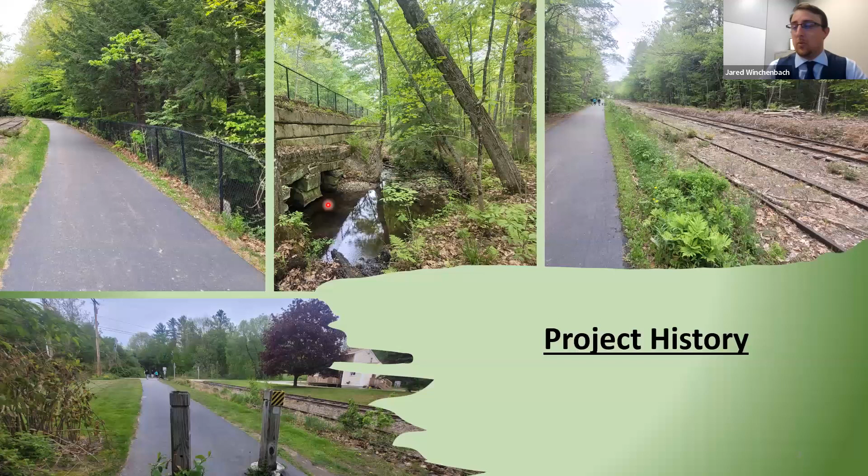Mark did a good job introducing everybody. This is just a list of everybody involved in the design as it currently stands. We do have sub-consultants helping us out along the way. So Mark already covered this, but I'll skim through it and give you a quick update on the project history.

Take a look at the big picture, the overall trail - there's an existing section just north of where we're looking to build. Then I'll go through the project description, limit of work - again Mark already touched on that - and then move on to the overall design and give you a technical presentation on what we're looking to do here.

Quick history - like Mark said, this project's been around since 2010-ish. It got put on the shelf, and now it's kicked back off, and we're looking to update the design to current standards. The pictures here are the northern section of the trail, from Route 202 up to Route 35 in Standish. I was out on it the other day and took some pictures. For the most part, our project is looking to do a very similar thing to what you're seeing here.

Big picture - on your screen, you can see my red cursor moving up and down. That's Route 202 in Windham. Traveling north along this green line is the existing Mountain Division Rail Trail. It comes up to the Otter Ponds and bounds around them, connecting to Route 35, which I believe is Chadbourne Street in Standish.

Our project is starting at Route 202 - or technically ending at Route 202 - and going south towards Bridge Street in Westbrook. The existing trail is approximately 5.5 miles, and we're looking to add another 5 miles to it, making it about a 10 to 11 mile trail, which would be pretty cool.

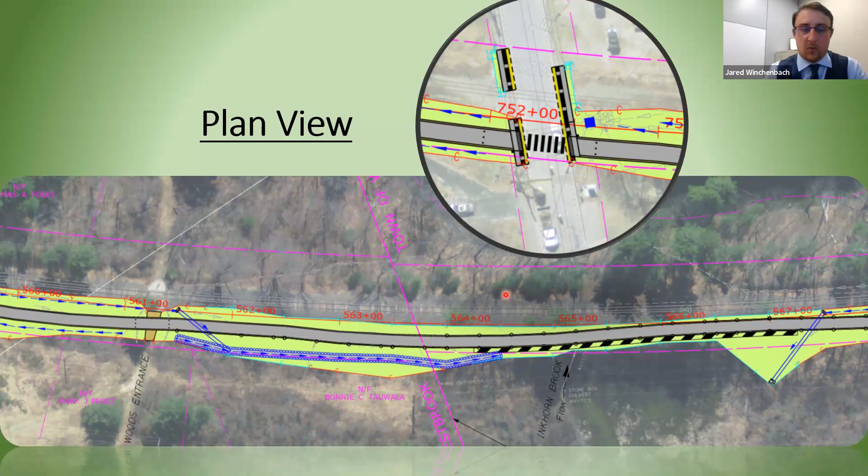Moving on to the next section, typical sections. What these are, for lack of a better way to describe them, it's basically if you take the trail and cut it like a sushi roll. What it does is you're cutting through and looking at the section itself - the gravel depths, the pavement, the ditching, stuff like that. Neither the profile nor the typical section is super important. If you have questions, feel free to ask, but it's really not the main focus we want to get to today.

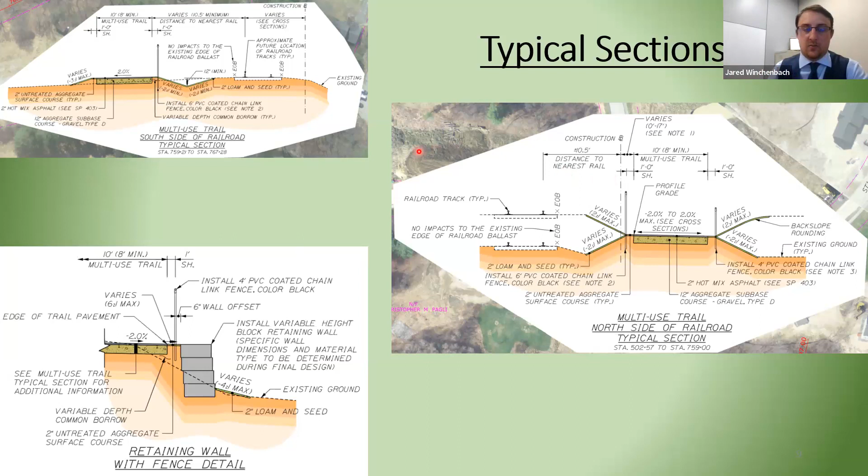So what I'd like to do now is just kind of walk you through the plans. These are going to be close-up snips of what the color rendering plans are. I obviously couldn't fit the whole roll plan in each slide, so I tried to break it up and zoom into the points that are more applicable.

Bridge Street - we start at Bridge Street in Westbrook. Bridge Street is running top to bottom on the screen here. There's an existing sidewalk on the east side of Bridge Street, which we're tying into. Then obviously the trail will take off from there and go north. A couple things to note: we're putting in rectangular rapid flashing beacons, you can see a couple black dots here. For those who don't know what those are, there's quite a few of them, I believe, in Westbrook and a few in Windham.

If you're up by Depot Street, they just put a couple in. Basically, it's for pedestrians. You push the button, flashers go, and it alerts cars that people are trying to cross there. So we'll have a set of those going in at this location.

The three dots you see here are bollards. One thing to point out with the proposed bollards on the northern section of the trail, currently they're wood posts in a concrete sleeve. These are actually going to be steel bollards, and they're going to be collapsible, so if emergency access needs to go on the path, they can remove the bollards and drive on it if needed. That'll be kind of an upgrade over the northern section of the path as it currently stands.

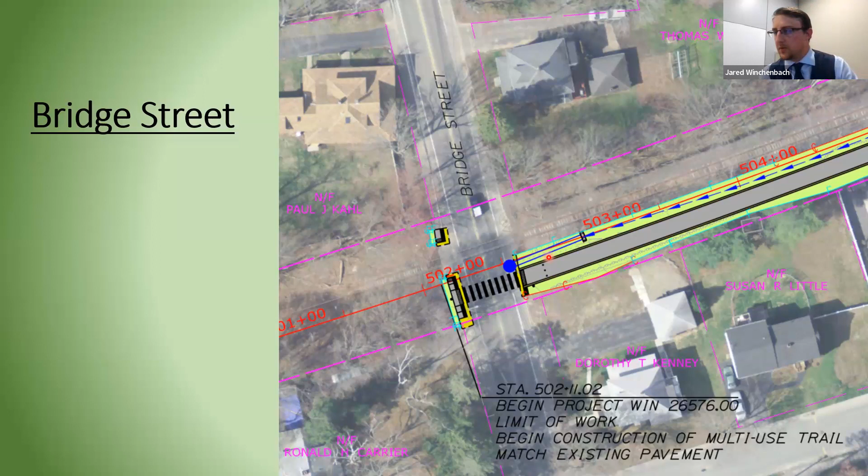Let's just make sure. Yep. So this is the first section, Bridge Street to Pierce Street. Bridge Street is on our left here, Pierce Street is on our right, up top. It's a little hard to see on my screen, but there's not a ton going on here. The grades are pretty shallow, we're not going to make the path go up and down too much. The grading is pretty minimal, so we're looking to minimize impacts along the backs of these parcels throughout between the limits shown here.

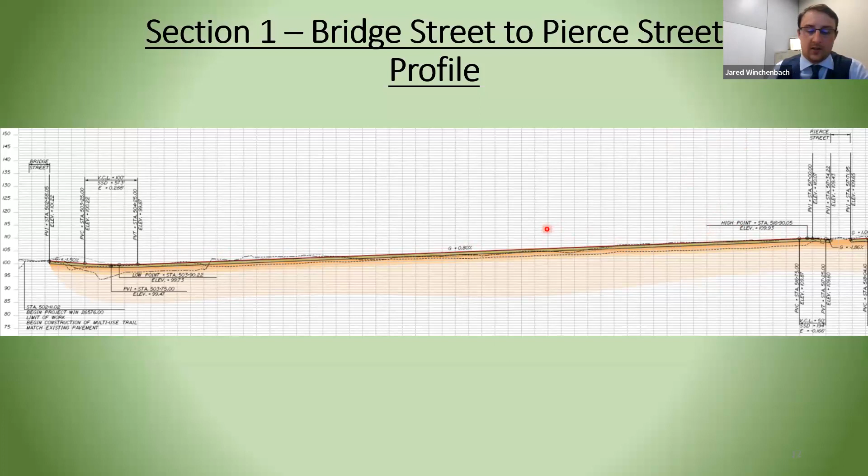So you can see the profile here. It's pretty flat, 0.8%, so very flat. It's very similar to the northern section of the trail. If you've walked that, you know it's very flat, very little vertical incline or decline, and that's what you're going to see here.

So it should match into the existing condition pretty well. Once we get to Pierce Street, very similar to Bridge Street in that we're going to end up tying in. There's an existing sidewalk on the east side. One thing I noticed after we put these graphics together, we're working to get updated survey, there's a mid-block crossing right here, an existing one. What might end up happening, I'd have to talk with the town or city on this, we may, since there's a sidewalk on this side but doesn't appear to be on the west side, extend this sidewalk down, connect to the path here, and cross there, eliminating this little portion of sidewalk, just to keep us from having two mid-block crossings within 50 feet of each other. So that might be one thought we could do.

Other than that, it's very similar to Bridge Street. We aren't proposing RRFBs at this location at this time, but you'll see the three dots where we are putting in the collapsible bollards. You'll see that collapsible bollards will be installed at every roadway and every access road through the project.

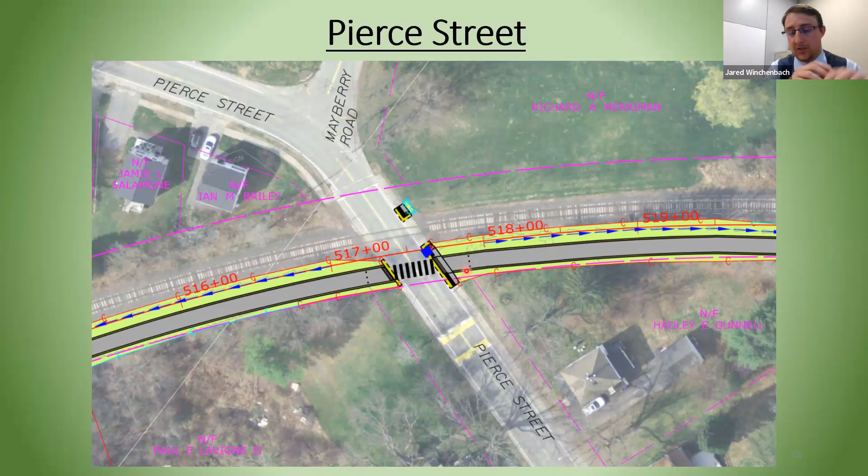The next section is Pierce Street to Stillwater Drive. Pierce Street's up on the left here, Stillwater Drive off to the right. It's very similar to the last section. You can see the profile down below here. It's very flat, we're not doing a bunch, we're not increasing grades.

One thing I think I failed to point out when looking at profiles, these black lines I'm tracing are existing ground lines. There are three of them in this case because we did one at the alignment and then a couple offsets of it, just to get a better picture of what the ground is doing. So you'll see that we might be cutting through some hills in order to make the trail a little less impactful to the surrounding area.

That will be, you'll kind of see this hill here aligns with this grassier area. So the bigger the grass areas, the larger the cuts or fills you're going to see. The intent was to not put those large areas in the back of somebody's yard.

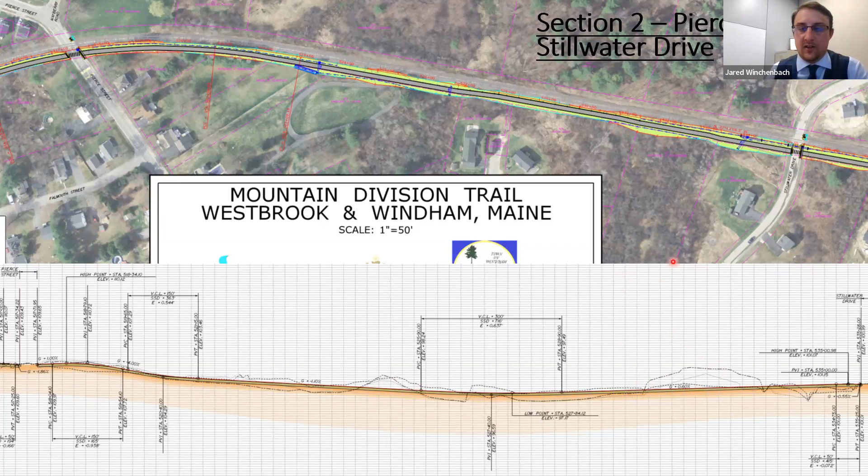Once we get to Stillwater Drive, very similar to the other two. Again, no RRFBs located here. We do have the trench across the road for drainage purposes. Other than that, we'll have the bollards, and that should be it at this location.

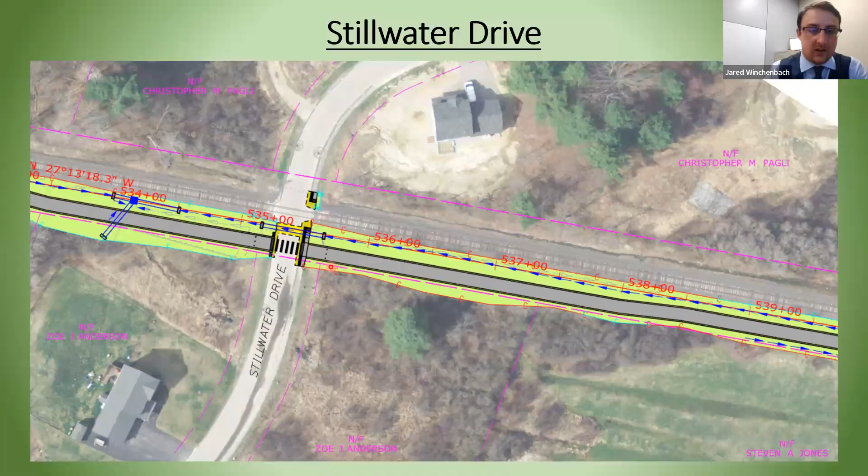Next section, Stillwater Drive to Rousseau Road. In between here, you can see this is actually where I got that other graphic from. It might be hard to see, but this is the town line. So in the graphic itself, you get Stillwater Drive here, it's going to continue left to right on your screen, then drop down here and continue left to right.

So a couple things to point out here. As I mentioned, we have an access drive. This is the first of the wooded entrances. Those are all set to remain.

You will see the first retaining wall on the project. This is just a little 2-foot, 3-foot wall. It's really just in between the path and the railroad to get drainage to work.

But you will see a much bigger wall here and down here. Reasoning for that is, again, high fill slopes that we're trying to avoid, potential impacts to wetlands, stuff like that. So continuing down, like I mentioned before, kind of jumped ahead, but this is the town of

Windham, city of Westbrook town line. So everything left of this and up here is all Westbrook. Everything moving forward is Windham.

We start out with the first of 2 stream crossings that we're going to have on the project. Inkhorn Brook. There's an existing stone arch bridge culvert that we'll get to a little bit later in the presentation, but just know that this is the location of it.

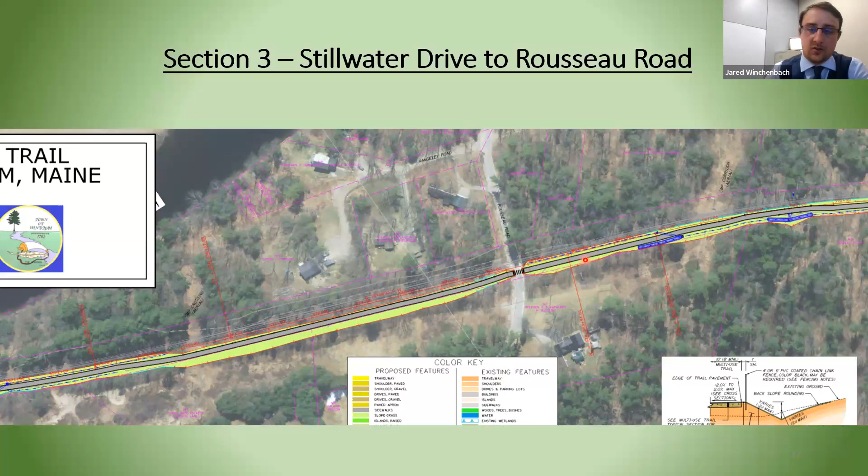Rousseau Road's crossing is pretty simple. I'll have a slide on that in a minute. And then other than that, we're just going to continue working the same kind of way that we had before, ditching to get the drainage where we want it, and then constructing the path.

Section 3, Stillwater to Rousseau Road, this is that profile I was just explaining to you. So about half of this, for you guys, this is Stillwater Drive right here. And then you're coming across left to right, same as we saw in the graphic, very flat for the first while. And then we start getting into, this is really where the rolling terrain starts coming in.

As you walk, this is going to feel different than when you're walking the northern section. The northern section being very flat for the most part. When you start at Route 202 up to Gambo Road, at the very least, is very flat. And once you get past this section on our project, it's going to have a little bit more rolling terrain.

Reason for that is this area is a little bit more geographically challenging than the previous, the northern section. So in order to minimize cuts and fills, we have to kind of raise and lower the path in order to make it work.

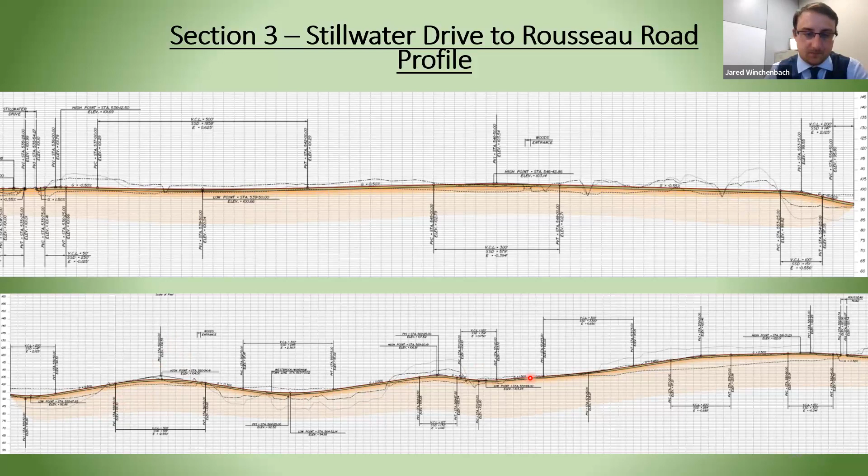Rousseau Road, the simplest of the crossings. A lot of these crossings will look very similar to what you'll see on a lot of Eastern trails when they cross smaller volume roads.

No other sidewalks on Rousseau at this time. If they were to be added at a later date, they could be included into the design. It's very easy to add them in, but at this time, there's no sidewalks on Rousseau, and we're just looking to basically put a crossing right through there. Again, no RRFBs, just collapsible bollards, pretty simple through there.

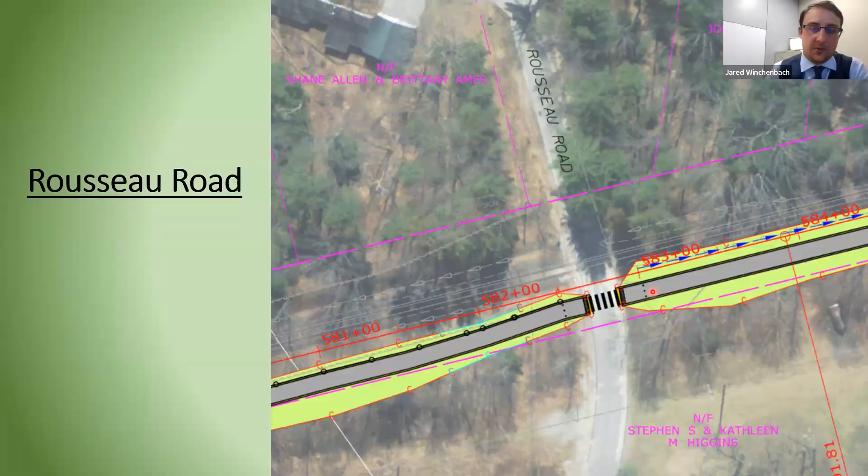The big section, Rousseau Road to Mallison Falls, I'm going to skip a little bit quicker on this section, just because there's not a ton of houses on this, and it's the largest of the gaps that I have to try to cover.

You can see the profile is down below, which lines up relatively well with the stationing. You'll see a couple where I keep the same profile down here, but just know that's what I'm trying to show, the kind of rises and valleys as we go through here.

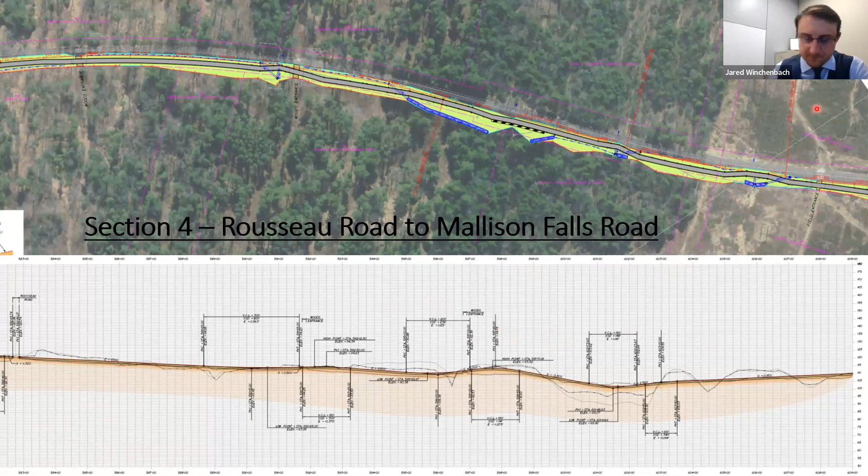So again, you'll see the blue ditching, you'll see the couple retaining walls. This on the right side is the CMP corridor that runs through there. So they'll still have access. We have an access road that goes into the CMP corridor for those of you that use that trail system. You can see that we're getting more green areas, which means we're a little bit heavier cuts and fills.

That's just due to the geography of the area. You can see some hills through here. It's not super rugged, still kind of rolling terrain, but it's flattening out a little bit through here.

More of the same, continuing across left to right, moving towards Mallison Falls Road. Not a whole lot to say in this section, pretty much more of the same. We've got a little bit of a high cut here, a woods entrance, and another high fill there. So we're pretty rural at this point.

You can see the Presumpscot River at the top here. So we're kind of close to it in some aspects, but we're still on the north side of the existing railroad tracks for the entirety of the project, until you get to the very end, which I'll explain a little later.

Again, more of the same. You can see the path weaves in and out, and then straightens out for a while. Those offsets where we're weaving in and out are sometimes meant to minimize impacts to the abutting landowners and stuff like that. We're just trying to minimize impacts the best we can by moving the trail as we need to.

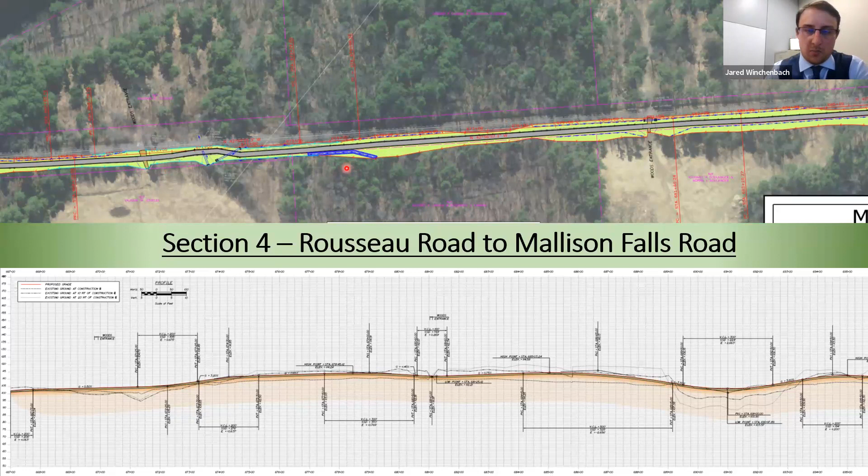I think we're coming up to the second stream in this project. So Colley Wright Brook is located right here. Again, we have a retaining wall going over the top of it, and I'll talk about Colley Wright a bit later in the presentation. Just know, this is the kind of location between Rousseau and Mallison Falls.

One other thing I want to note, there's a flag right here. I think it was 2012, the Maine DOT had installed railroad from Bridge Street up towards the existing railroad at Route 202. Their project ended right about here, so there's no rail from here moving forward.

What we did was use the Maine DOT's right-of-way mapping and future railroad plans to figure out where the proposed rail is going to be. That way we can maintain our offsets, and it doesn't preclude adding a rail at a later date if anybody chooses to do that. So we're still maintaining those offsets.

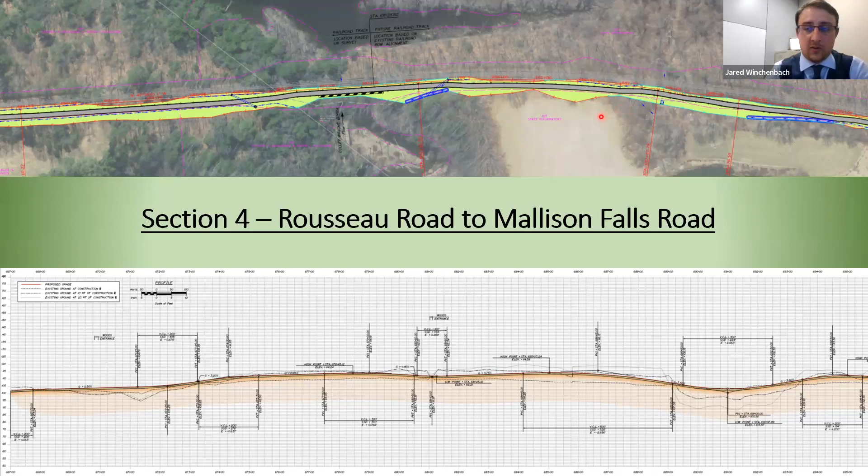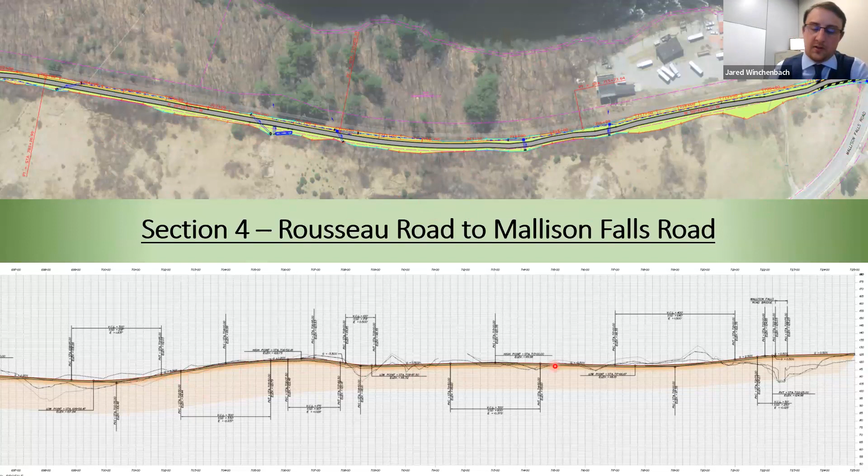Moving forward, this area is where you start getting into the Maine correctional facility. On the bottom of your screen, that's the Maine State Correctional Facility. The path is on top here, on the north side of the railroad, or future railroad. On the right side of your screen is Mallison Falls Road. The profile stays pretty flat through the majority of this, with a few hills here and there.

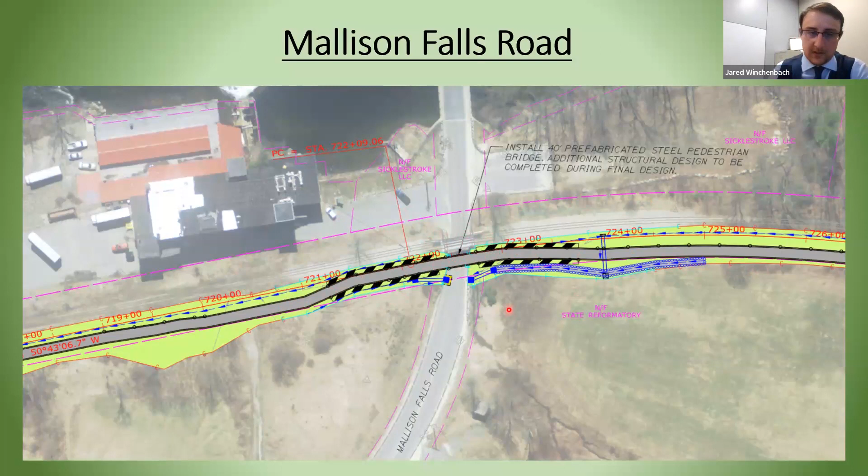At Mallison Falls Road, one thing I wanted to point out, we don't have an at-grade crossing. We're looking at putting in a 40-foot prefabricated steel pedestrian bridge that will keep pedestrians at the same level. There's an existing railroad bridge right here that we're not impacting. We're building at roughly a 10.5 to 15-foot offset, I can't remember exactly. So pedestrians can basically come up, over, and back to the path without having to cross Mallison Falls at all. That's our plan there.

Last couple sections we're going to look at: Mallison Falls Road, just off your screen on the left, to Depot Street. Mallison Falls runs left to right on your screen, then drops down and runs left to right again, with Depot Street right here.

As far as the plan goes, it's very similar to everywhere else. You see a deep cut here because you're on the backside of a hill. Other than that, there's not a ton of impacts. We're just ditching in order to get the drainage to go where we want.

The profile through here is very flat. Nothing particularly special about that.

Depot Street, this crossing is going to be a little more interesting than the others, only because the town recently did a project on Depot Street where they installed rectangular rapid flashing beacons at this location. They built sidewalks on both sides, made it look really nice. Our survey, you can see some gray in there, doesn't include that. We're getting a survey update in order to better understand the intersection and how it's laid out.

At that point you may see a new design here, but as it currently stands, this is what we're proposing. We're trying to tie into existing or recently built sidewalks and maintain nice trail connectivity going straight across, keeping the path on the north side through this section.

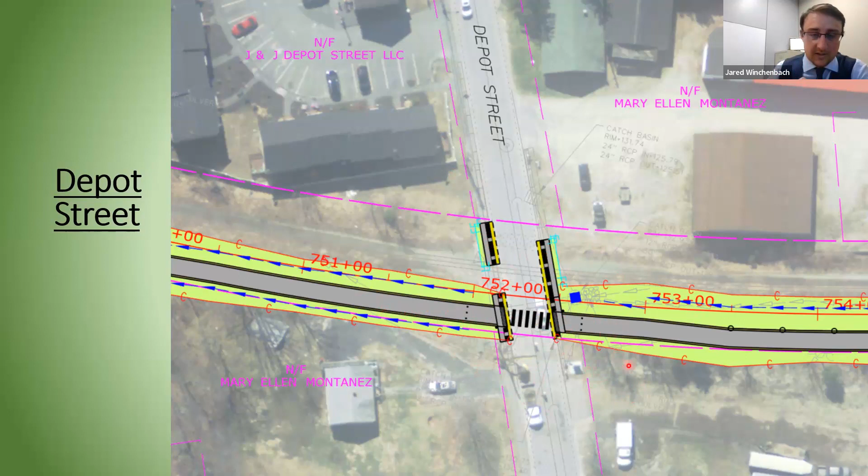So the next section and the last section, Depot Street is on your left, Main Street is on the top right of your screen here. You're going to keep the path on the north side all the way up to an existing driveway. I think this is the fire station, and I believe they build satellite dishes in this lot. I might be mistaken, but I believe there might be a fire department practice facility or something over here.

This driveway essentially has access to a parcel over here, and we're looking to make use of that and cross at a similar location in case, or when, the rail comes back. They'll want to minimize as many crossings as they can, so if we put it next to the driveway, it just makes it easier for them in a future condition. So we'll cross to the south side and finish up there.

The main reason we're moving to the south side is twofold. One is down in this corner, you'll see Black Brook, so in order to avoid impacts to Black Brook, it would make sense to move us to the other side of the rail. The second thing is that the northern section is on the south side of the trail, or the rail, so it kind of makes sense to switch over.

It may be here. We did talk with the town, it may be at Depot Street. We haven't quite finalized where we're going to transfer, but this is as it's currently shown. This is what we're looking at doing.

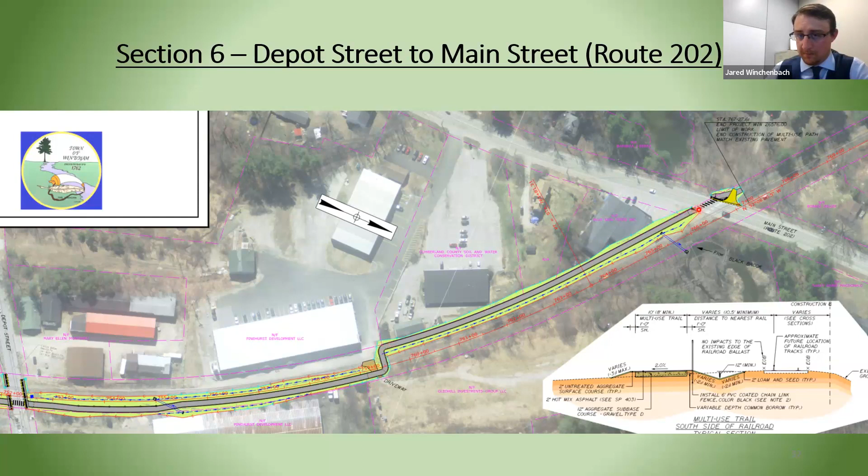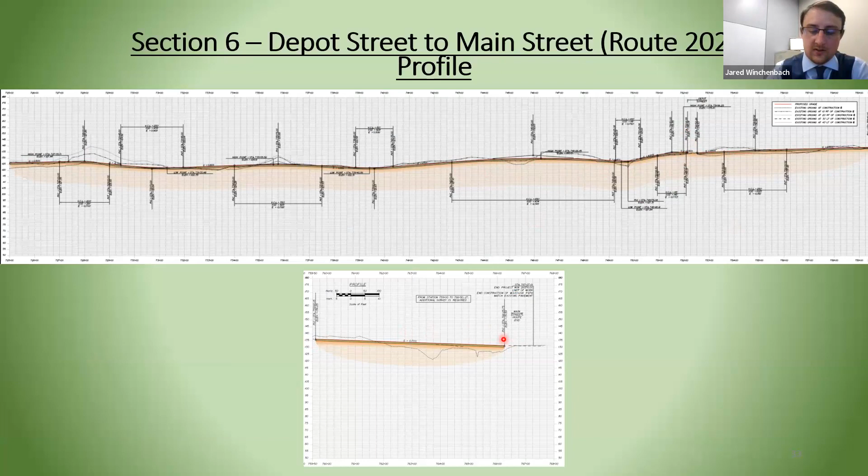Profile through here, you can see two sections. So Depot Street's right here, so it's really looking at this section, very flat. And then this is from when we cross over the rail up to Main Street, very flat again. So that's going to look a lot like the existing rail section, or the existing trail section just north of us. As mentioned, we're on the south side now.

This is Blue Seal. We're going to have a crossing location here. One thing to note, Route 202 Main Street, the town of Windham has another project going on right now where they're looking to build sidewalks and put in an RRFB at this location.

We're working with that project to ensure that there's no overlap and that we don't have to reset stuff at a future location, at a future time. Basically trying to minimize rework as best we can, so there'll be some changes here in the future. We're looking to kind of minimize the challenges there by working with the engineers on that.

One thing to note on this top side, this is kind of a challenging location. There's an existing driveway that goes up to a house here, and they kind of have a mixed driveway / multi-use trail entrance here. We're trying to fix that by delineating the two and giving them a proper driveway without having it mixed in with the trail itself. So that's still a work in progress, but that's the idea.

As mentioned before, Black Brook right here, there's a crossing, there's a culvert that goes from here to here. We're looking to avoid that, that's why we're on the south side. So that gets you through the plans. Thanks for staying with me on that, I know it's a little bit long-winded.

Drainage real quick. Mostly drainage is going to be open and closed drainage. Open drainage is basically ditching, closed drainage is using pipes and catch basins. There'll be a little bit of both, but for the most part, we're going to try to do ditching. It's just easier to maintain.

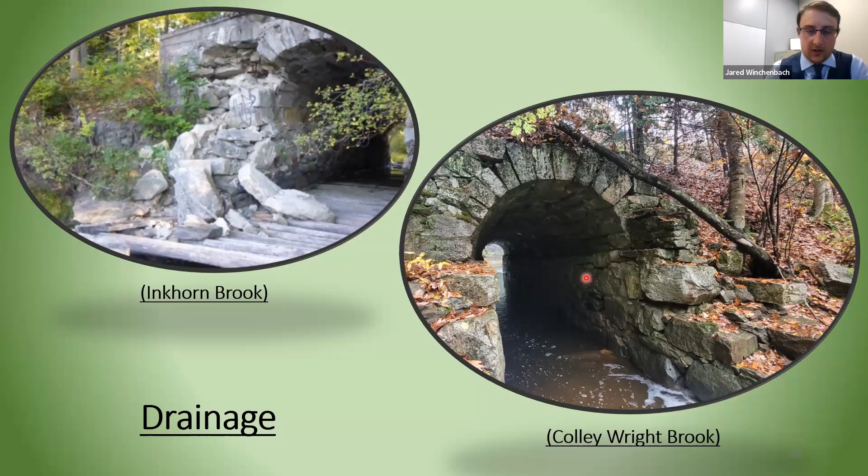The DOT is starting to look into it. They've hired, or are looking to hire, a structural team to investigate these two bridges, and we'll be working with them moving forward. We don't have any information right now, as it's very much in its infancy, but we're trying to figure out what shape these culverts and bridges are in, and how to move forward at these two locations. So more to come on that, but nothing in the short term.

Real quick, looking ahead, a couple key things. We've got utility coordination. For the most part, this project shouldn't be a huge utility issue. There's not a ton of utilities out there right now. Where we do run into utilities will be at the side roads for the most part. When we do have utility conflicts, we'll try to minimize them as much as we can, to make it easier for everybody. If we can mitigate what we're doing out there, that'd be best for everybody involved.

Next thing is environmental coordination. We have a sub-consultant on board to help us with the environmental work. There's streams out there, and we have wetlands that we know about. We're still getting those delineated and into our survey. Basically, they're on board to help us through the environmental process, and coordination with the agencies is ongoing currently. They're going to help us through the process there.

Next, I want to chat about the right-of-way process. The trail itself, the 10-foot wide trail, with the one foot, so basically 12 feet - 10-foot paved, 1-foot gravel shoulders on either side - will be maintained within the existing railroad right-of-way. So you won't see the path outside the right-of-way. However, there will be grading outside the right-of-way, so where you see those fill lines coming down past the right-of-way, that's mostly due to...

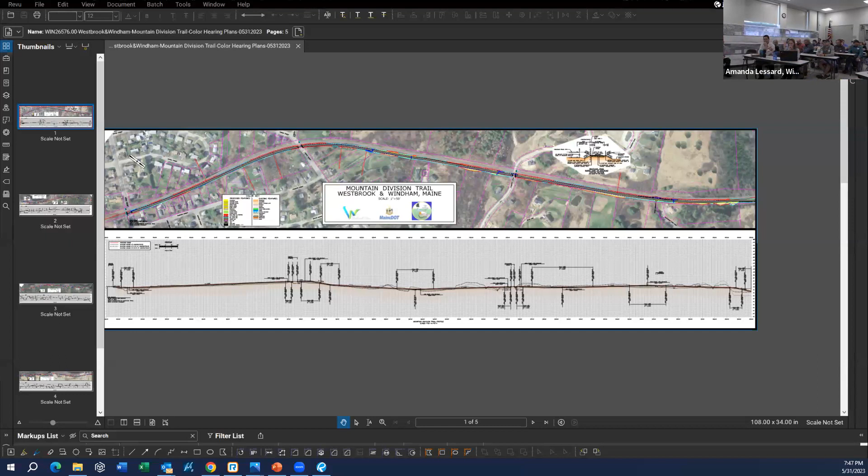Nancy: How is it you got a 2 to 3 foot wall? It's described as a little wall, and there's animals there. How is an animal, a deer, gonna jump a 2 or 3 foot wall? How is this impacting the wildlife? This is supposed to be a nature trail, supposed to be an improvement of nature, people walking. How are these things improving nature?

I think the walls, for example, are just over a short distance, so certainly the animals can move beyond those and figure it out. The purpose of the trail is to be blended into the environment, but it is a human right-of-way edge there, so we're doing environmental review to try to evaluate it.

And I had another comment - you're putting this near the railroad tracks, because at some future date you're thinking there's going to be a railroad. Is that correct? There could be. No, we're putting it near the railroad because there's right of way, we can put a trail there and we'd like to have it off the road, so that's the reason why.

Well, I thought you made some comment that it could be at some point. Well, there could be. Okay, so that's another reason, because there is some requirement that the distance between the trail has to be from a railroad. There's some state requirement, I think it's 11 feet. Jared mentioned what that was, so.

Yeah, the distance between the nearest rail and the nearest edge of path is technically 15 feet. But you can go down to 10.5 feet, which is probably where you get close to the 11 foot there, under certain stipulations. Which is why we're working with the Maine DOT and their railroad department to ensure that in areas where we drop down, we meet the criterion.

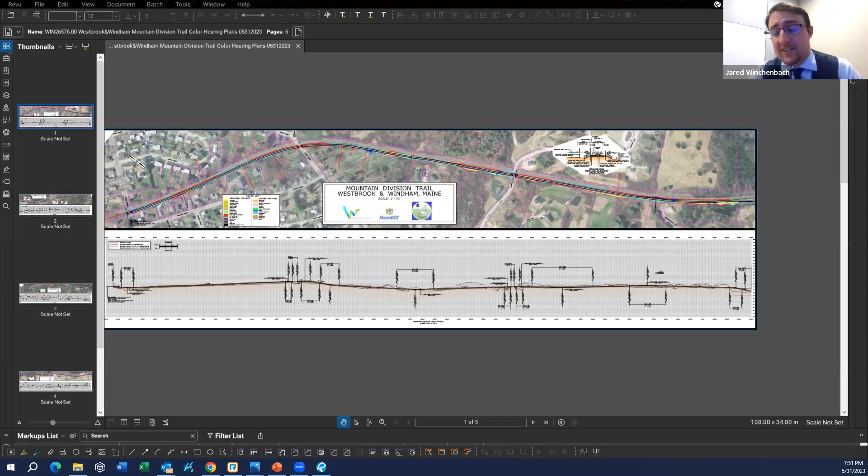Bruce Elder: We have property on both sides of the railroad track, and we do have a road that crosses, so you're right on that topic. What's the width of the railroad right of way? It varies throughout the project, depending on what section you're in. I'd have to look back at the PDR. There's sections that are 60 feet, there's sections that are a little bit bigger. I don't recall off the top of my head exactly what it is. We're just above Russo Road. Our road is a few hundred feet to the Windham side of Russo Road, and we're concerned about access to that piece on the riverside.

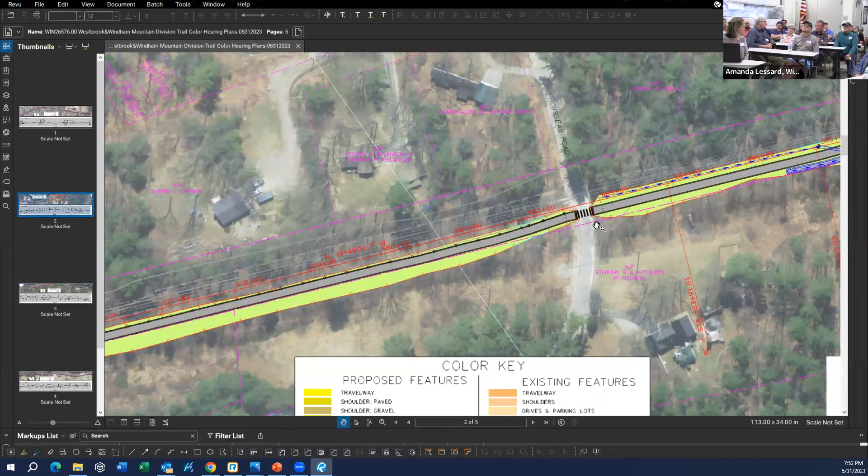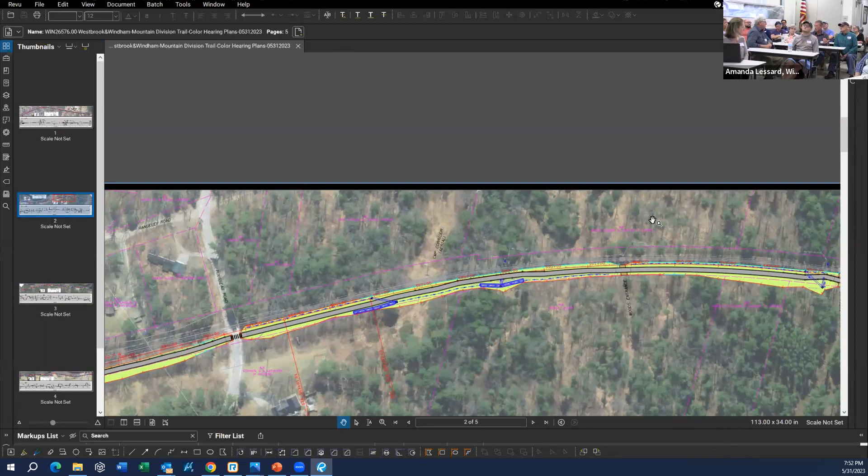So I guess I'd want to know what limitations there might be as this comes through in terms of development, perhaps, because there's land enough for the riverside that it wouldn't be us, but our next generation might very well want to. There's probably 4.5 or 5 acres between the railroad and the river right there. There's another parcel that we own that has a little less than that.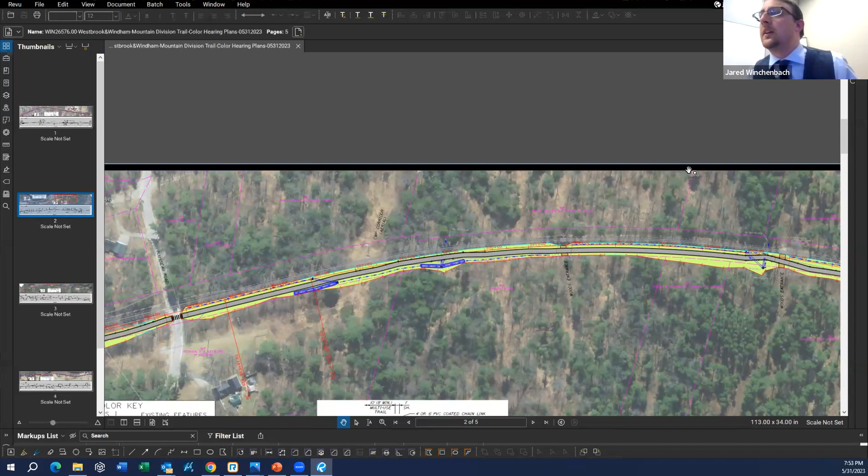So I didn't catch your name and I apologize for that. Bruce Elder. Okay, can you guys still see my screen? Yes. So I believe this is the property right here. I see Bruce Elder here and one right here. And the right-of-way lines are going like this, if you can see my mouse.

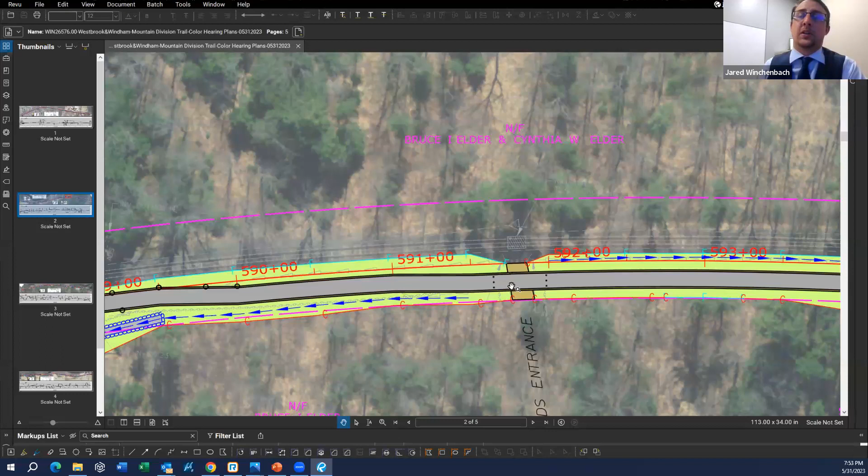So we do have currently, I don't know how many crossings you have in your parcel, but I can see one for sure right here that was flagged in the old right-of-way railroad tie track crossing. We are maintaining that. If there's a certain width you would need to get through there, that's a conversation we can have. We were just basically holding the width of the ties and going a little bit wider than what was out there currently. But the intent would be, if there's access to be maintained, we're not looking to create difficulties there. But any future crossings, just like you'd have to do today, is a licensing agreement with DOT. And if the trail was constructed and you later wanted to cross it, you could do that and go through that same permitting process.

And I would add to it that not only for that development, not only are you crossing the trail, but you're crossing the railroad track, so you need the approvals to cross. You'll have a harder time probably getting approval to cross the railroad tracks than you will need to cross the trail.

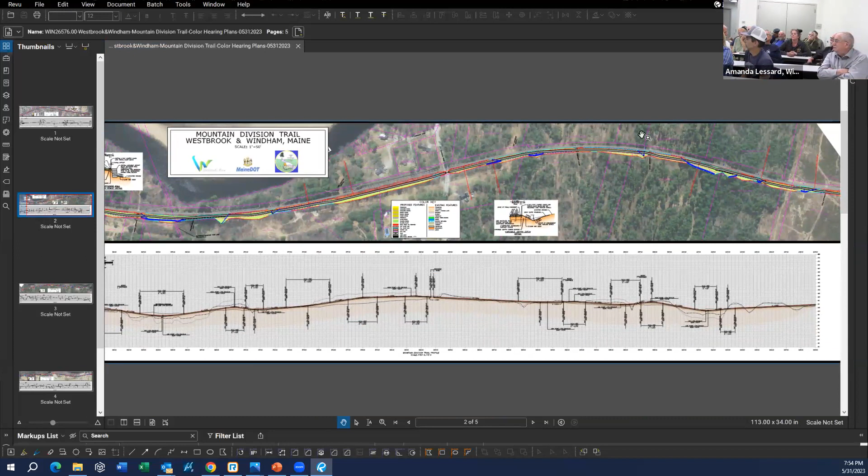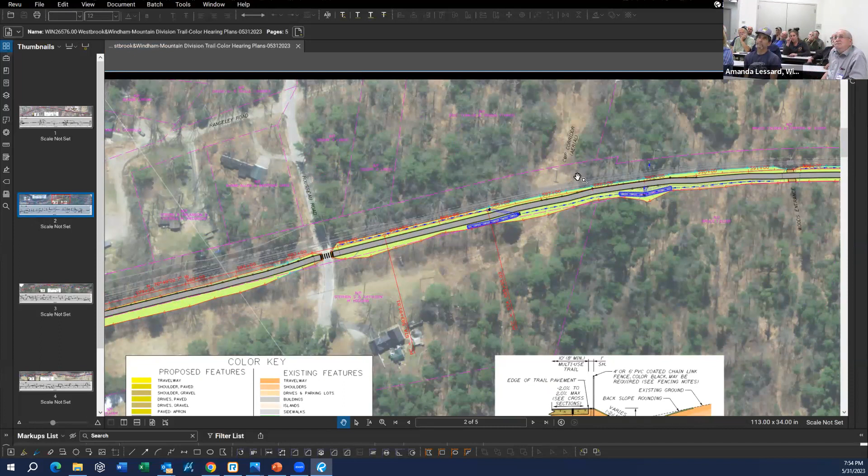I'm just wondering if landowners can request... Oh, I'm Trisha Tomkus, we're right next to Elders actually. And I'm wondering if landowners can request fences, because that area with the CMP corridor, that must be a really old picture, but that is our property and we have a hoop house out there and gardens. Our daughter has a camper bus that she camps out in overnight, and it's really open, so there's going to be a huge change in privacy and security concerns.

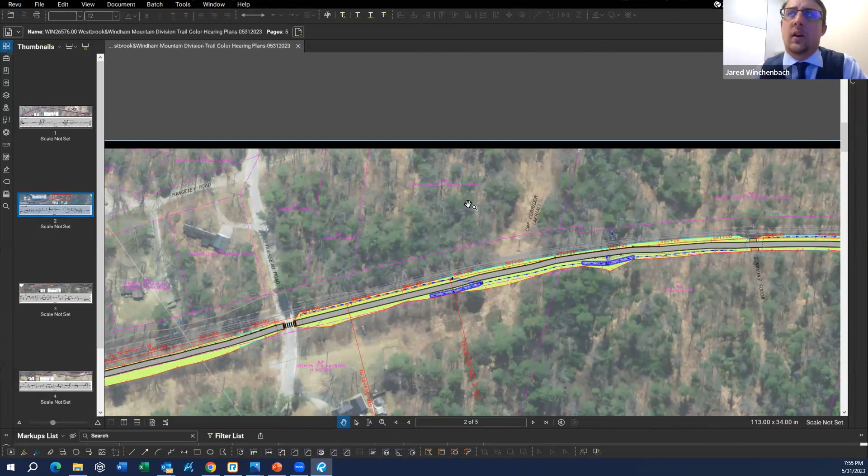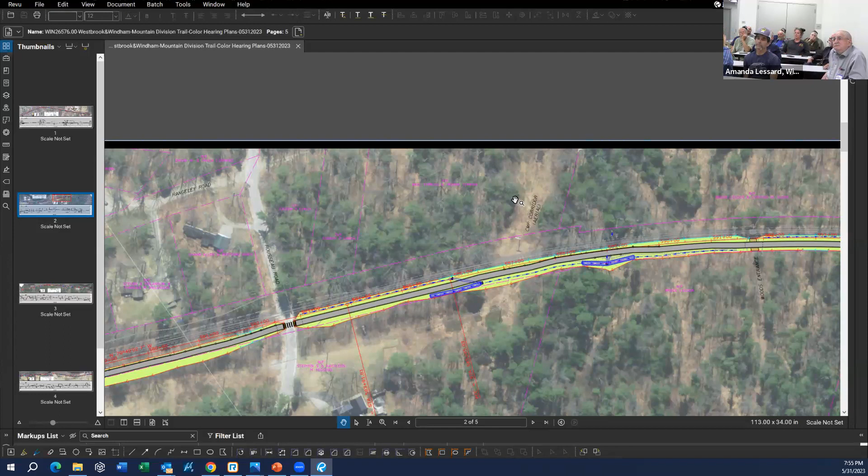So, you're on the south side of the rail currently, is that correct? Yep. Okay. So our area, the CMP corridor, that's all our property in our field. They have that right-of-way, but we own that property, and that's where we have a camper bus and a greenhouse and a bunch of different things out there, and it's a very open view when you walk by on the railroad tracks currently, so I just really worry about it kind of inviting people in, you know.

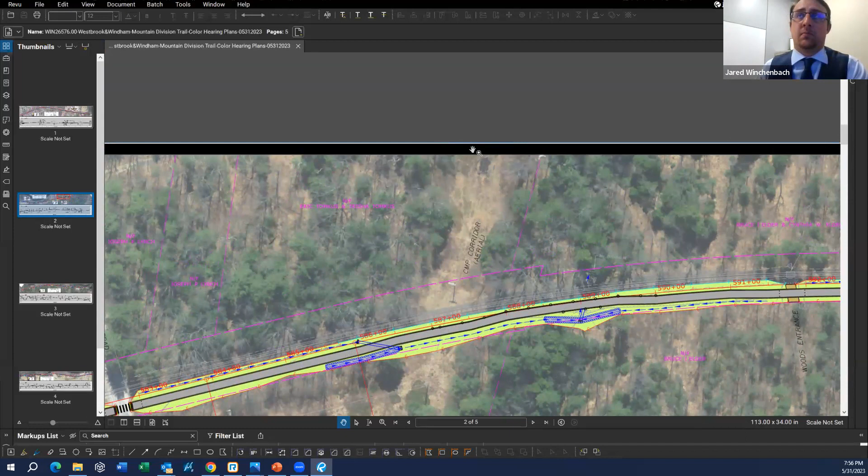Yep, it does look like we currently have a proposed section of fence along here. It's not for anything related to the corridor, it has to do with, likely at this point, because of how close we are to the rail, so we had to put a fence in anyway. It doesn't look like it goes quite all the way though, it looks like it maybe starts in the middle there. Yeah, it starts right about in the middle of the pole line there. I don't think our aerial goes up far enough. It should be a 2021 aerial, so it should be new, but it may just be that what you're talking about is up just off screen or something.

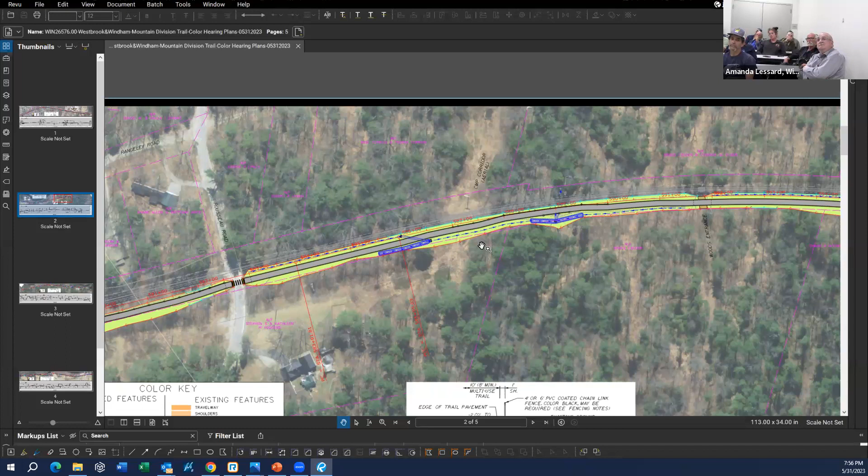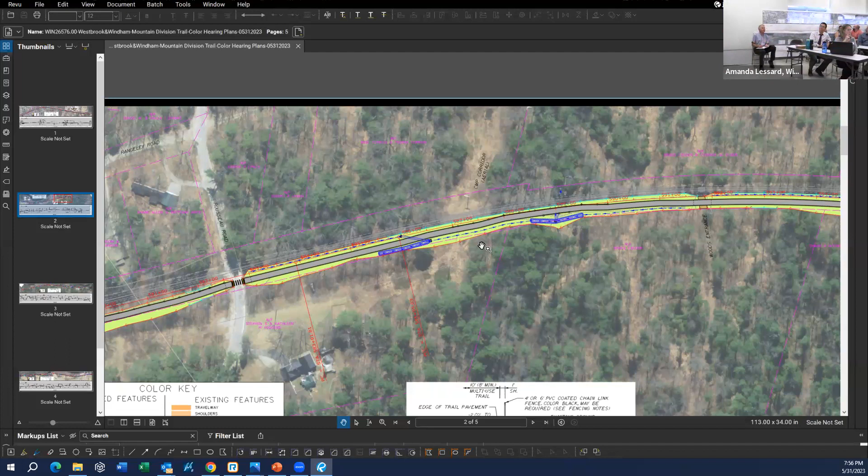So who would we be in contact with in the future to see if it would be possible to extend that section of fence and to possibly put up no trespassing signs and things like that? We could take your comment and look at that area in more detail, but like Don had said, there's certain requirements where we need to have fence and others where you don't need fence, so we'll take a look at that area and see what would make sense.

I'm David Sparks, president of the Russo Road Association. Russo Road is not a public road, it's a private road. The only people that have access to it are the residents and their visitors and the town of Windham. We maintain the road, we pave it, so we don't want a lot of cars coming down there to park to use the trail, so we would request you put up no parking signs on both sides of the road to keep the public off the road.

We also have concern that there are other residences there with their lawns abutting where the path would be. They're concerned about people coming onto their property, so they would request a fence along the property lines so the public wouldn't be coming onto their property.

I have a suggestion to that too. I think what Jared answered covers that. Sorry, what was that? Did you have a response to that?

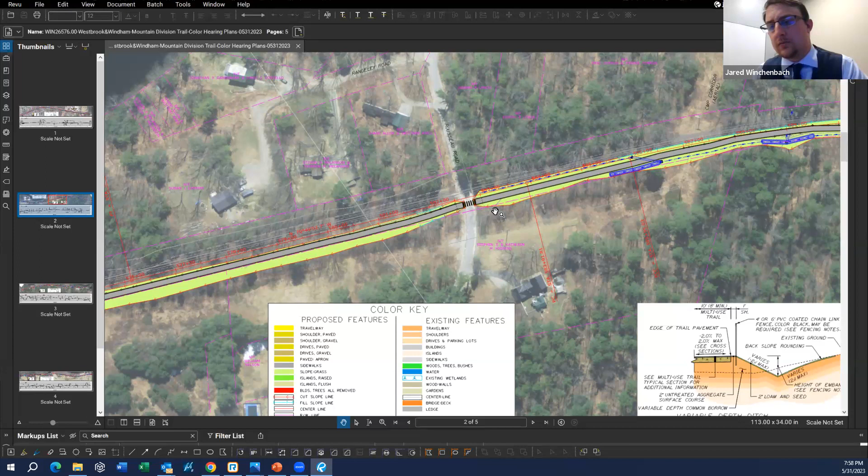Yes, so twofold. As far as the parking goes, that's something we'll take note of now. It's a good point, Russo Road's pretty narrow anyway, so you really don't want parking on a road that narrow to begin with. We'll take a look at that for sure.

As far as the additional fencing, I assume we're talking more about potentially these parcels here, just because that's the side the path is on. Going back to what Don said with the fencing, currently what we're proposing is fencing wherever we're required to put it. However, if there are right-of-way impacts to the parcels, that may be something you can handle in the right-of-way negotiations as far as construction easements and stuff like that.

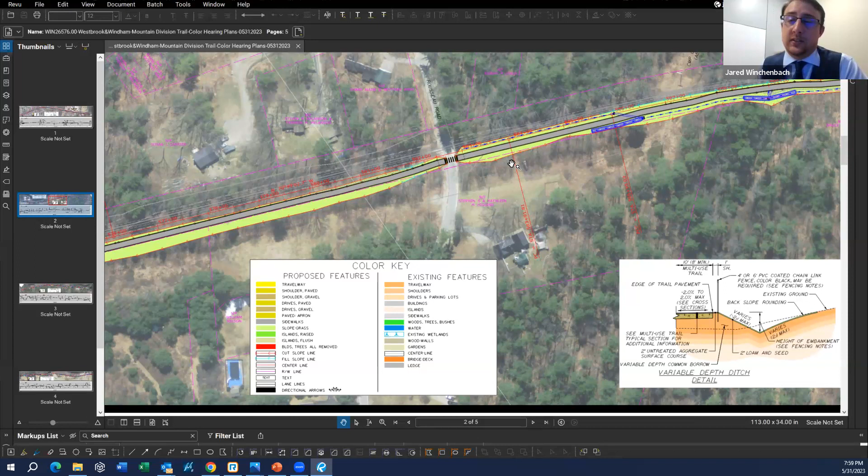Don, you may have a better or more in-depth answer than that. That would be my thought. Would it be my understanding that fencing would be between the rails and the path the whole way?

No, no, we're gonna put it where we need to. If we design the trail too close to the railroad, that will require us to put fencing. So we have sections where we need fencing between the two, but it's our goal to separate them so we don't need fencing on the outside of the trail, on the property owner side. Jared's been referring to north-south, I like to say west-east. The river's on the west side, you've got the railroad, we're putting the trail on the east side, the non-river side of the railroad tracks.

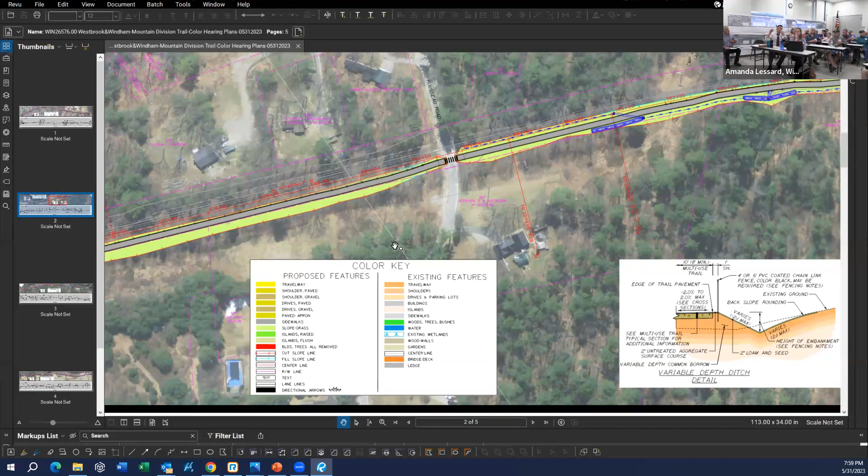So if we have steep grades in that area, we're gonna put a retaining wall in near a drainage structure or heavy fill. We'll put a fence in that area to protect bicyclists using the trail and walkers from slipping off a steep edge. We're not intending to fence it necessarily for privacy or because the abutter wants it.

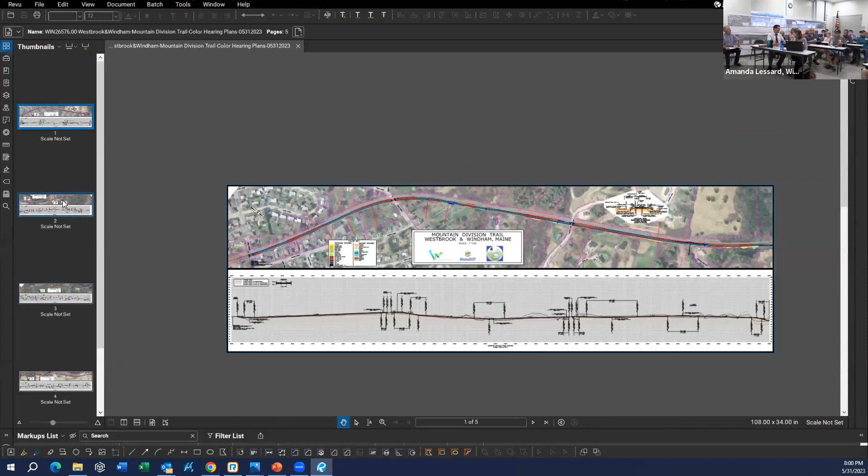What I would tell you is these are 50% design, we have a long way to go. If you have concerns about fencing near your property, I would bring it up to Mark, to the town or city, whatever community you live in, and town officials will take it under advisement moving forward. We'll look at it on a case by case basis.

I'll also tell you, when and if the project gets funded for construction and goes through the right-of-way process, the right-of-way appraiser will be meeting with each property owner that has impacts, and those are times you can bring those requests up - hey, I'm really concerned for this reason, can you accommodate this request? So you're gonna have 3 or 4 more tries at this before we get to the end. We will come back for another public meeting when we get closer to 75% design, so we're collecting comments now and we'll come back later in the year.

With kind of a revised design, you guys can take a look at it, and then there's still a long process from there to go through, so.

If there are individual requests for things like that, I would encourage you to speak with your town officials.

Yeah, we've already gotten some emails with concerns on the project, so if you don't voice it in the next week or so, you can email. I think my email address is on there, and you got other ways too, it's also on the phone here, you can find it.

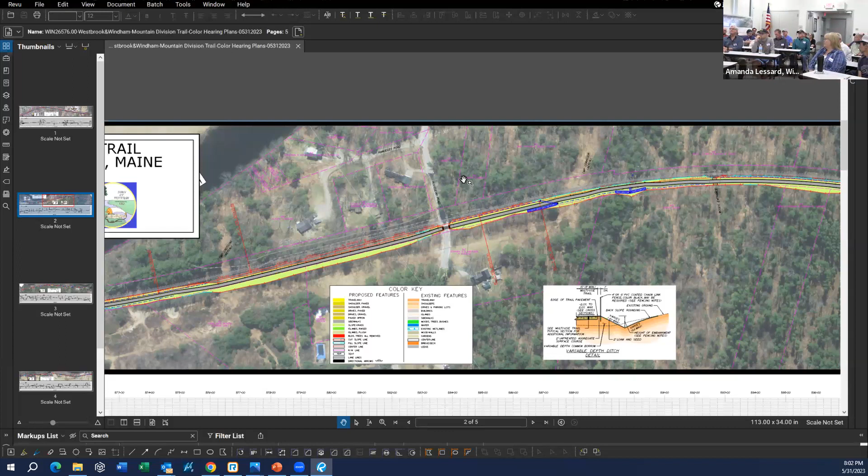And my question is, so we live at 46 Main Street, where the end of our driveway is also part of the trail. So far that's worked, there's been some close calls, but I think I heard you say that you were going to try to separate the trail from the driveway. There's no room on the other side. The only way that can happen, in my mind, is for you to relocate the mouth of our driveway to the south. And my concern is that we have infrastructure south of the driveway in the form of lawn, garden, stone monolith. There's also a topographical problem with it as you get into the fall off the Black Brook. So I need to see more soon about the plan for separating the trail from our driveway.

We love being stewards of the trail, living along the trail, it's a great thing. There are problems sometimes, sure. Overall, it's a big asset to the whole region. But I'm gonna need to see plans for how you're gonna separate the trail from the driveway. It sounds to me like you want to move the driveway, change the topography, and supplant the infrastructure we already have.

I think that area, I mean, we'll definitely take a close look at that, because there are some conflicting spaces there with the trail and driveways, so we will definitely consider your comments, and thank you.

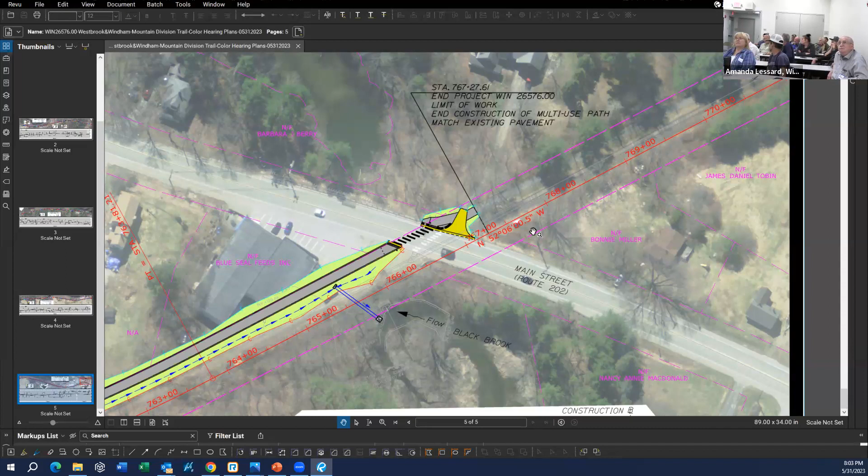Hi, Steve Higgins, I'm an abutter on Russo Road. And I guess the next question is, Russo Road showed a fairly substantial cut that goes beyond the actual DOT property lines. How is that going to be taken care of with the property owners?

So that comes back to the DOT's right of way. In theory, again, assuming the DOT is the one doing the right of way, which we're pretty confident would be the case, that goes back to what Don was saying - it would be a construction easement in which the DOT would send an assessor out to get value of the impact, and then would sit down with the property owner. I believe it's multiple times, Don, you can correct me if I'm wrong. And basically they'd work with you to figure out how do we mitigate these impacts and how to move forward. But you'll get a couple stabs at how you want to move forward with the impacts. And again, we're at 50% plans now. Ideally between 50 and 75%, if we can mitigate impacts further, that's what we're going to try to do. This is kind of our first swing at it.

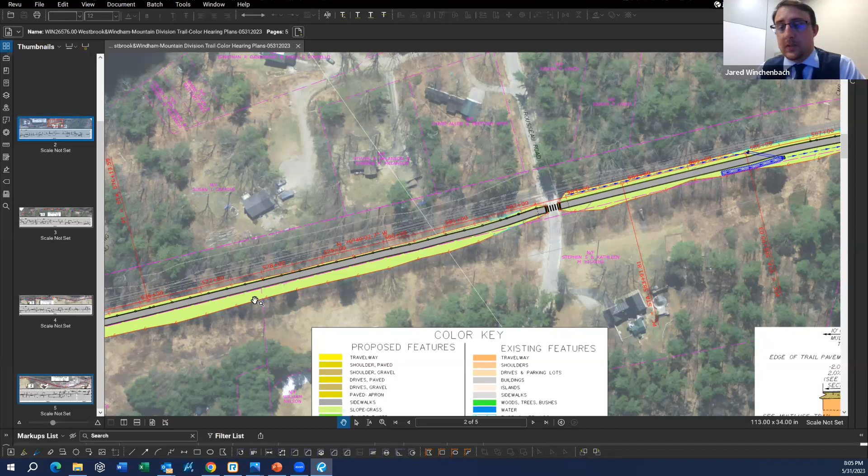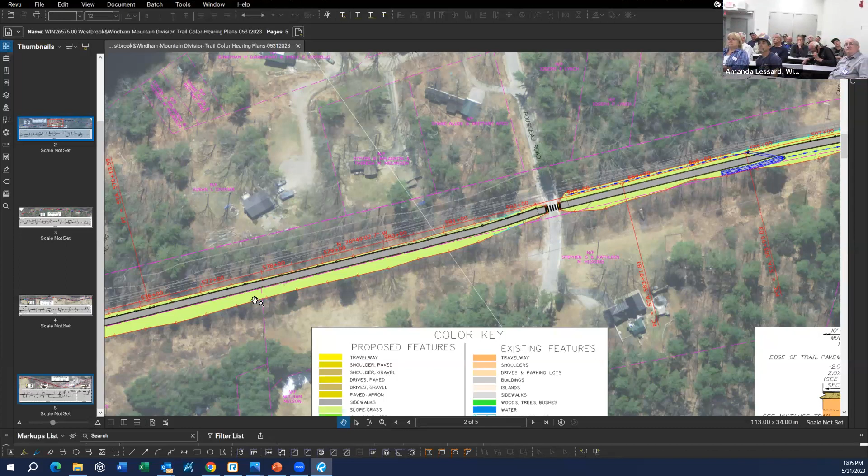Don, if you have anything to add as far as the right of way, I know you're a little bit more in depth with that than I am. A little bit more in reference to the crossing at Russo Road - if you're looking at the map and you come down a little bit on the left-hand side, you see a little bit of like a little turnaround. Are you talking on the little bit, right, yeah, little circle? The little circle - no, other side of the track, the other side, right to the left of Stephen. Right there. Gotcha.

That was originally a planned school bus turnaround that's been non-existent forever and a day now. And already we have a lot of people that come down and park there to walk the railroad tracks. I also am a little concerned, I own that property and I'm a little concerned that this is just going to greatly impact the amount of people that want to come down to be able to walk the trail system down through there. Well, I'm sure that that's something that we can look at and deal with at some point in time.

The other issue that I have is at that turnaround, from that point going to the railroad tracks, there is a steep drop in grade that goes down. So I'm kind of curious how you're going to have to dig that whole Russo Road section way back to change the grade, and then come down and make a flat spot, and then another flat spot for the railroad tracks. I'm a little confused about how that would actually work out.

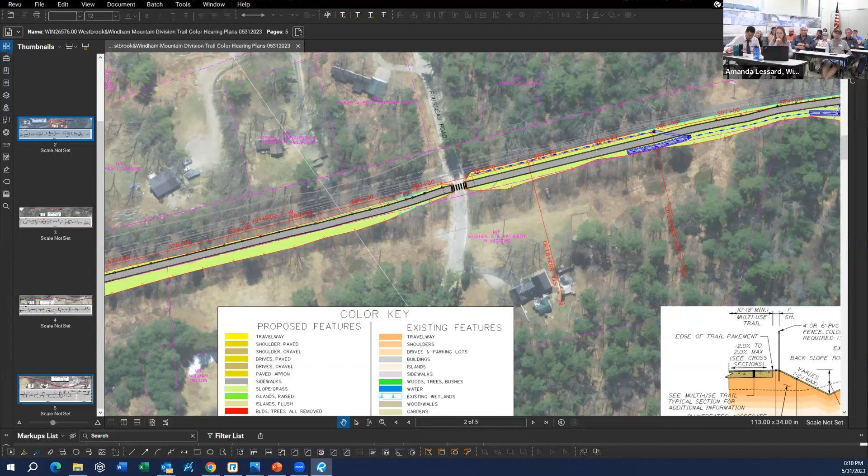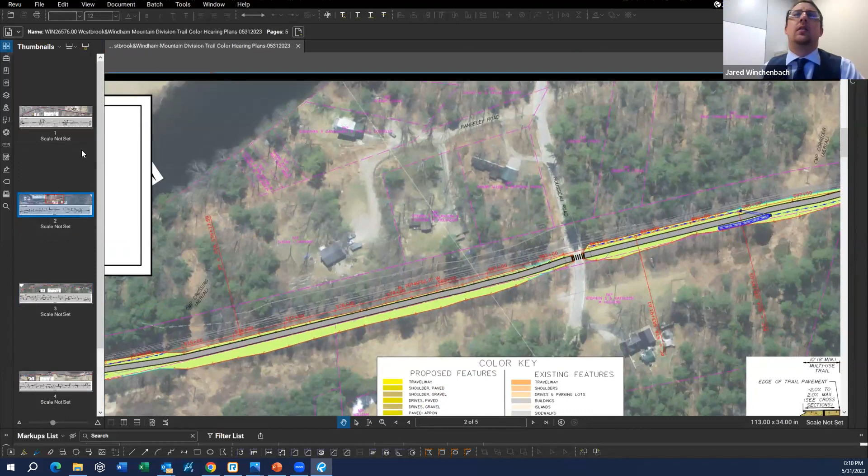So it would be, we're kind of maxing out the right of way in this area. I don't know if it was this parcel or which parcel we're talking about specifically, but around this section, we're probably 20 to 25 feet closer than the nearest rail.

The red dash line, Jared, in that area represents the right of way, correct? Correct, yeah, it's pink, but it shows up red here, I think. Okay.

Paul Carr asks, have options other than asphalt pavement been researched for the pathway, thinking of ongoing maintenance and other environmental considerations? Jerry, Mark had actually talked to us about that. He had spoken with Jerry, the main DOT rep, on that. We're actually looking into that going forward. Paved is ideal from the perspective that it's the lowest maintenance, and it resists some of the wear and tear, and drainage would be better than some of the other products, but it is something we're looking at.

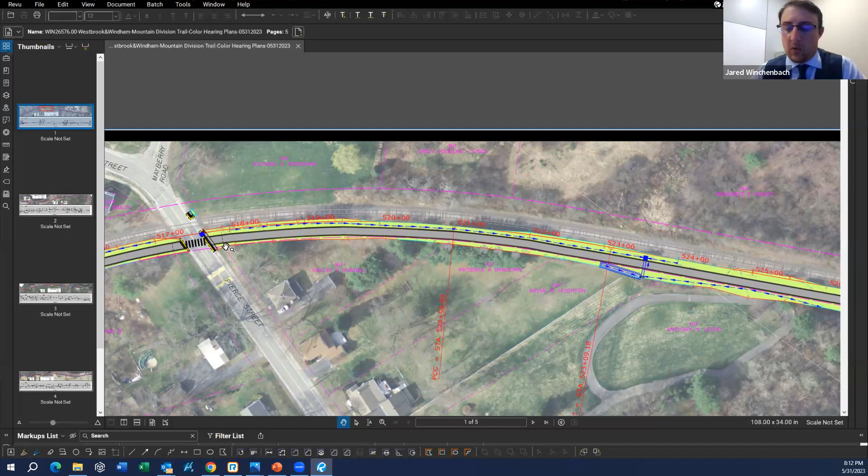With the goal that the surface needs to meet the ADA requirements. Correct, yeah, the goal would need to be ADA access, ADA requirements—so compact, densely compacted, non-slip, stuff like that.

Okay, two questions from Mike Lynch. Well, one's a comment really, more just that the reason for all the questions on the fence is because the north section fence is in considerable disrepair. The new section needs to be much better than what is currently on the north section. And then he had a question: so with all these steps which still need to be done and the $11 million cost, when should we really expect to be able to ride or walk on this new section?

All your legislators? No, yeah, I was gonna say I'm gonna let somebody else handle this one. Do you guys know? Not off the top of my head. I mean, I don't think we know. We really don't know at this point. We're just doing a preliminary design, we're getting comments, and as Don or Jared mentioned, we have a ways to go. We're gonna try to incorporate what we can here to move to the next phase of the stage of design. And then once that process is completed, we'll be looking for funding, but there's really not any answer that could be that close to accurate at this point.

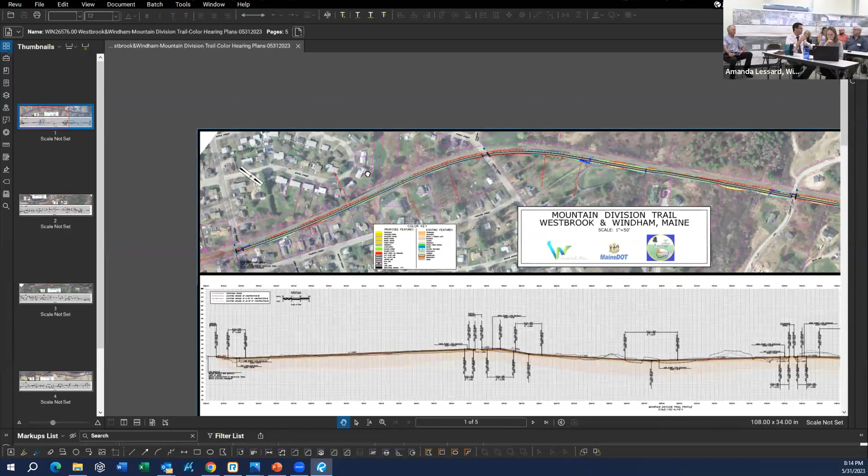Go ahead, Don. Yeah, if I could add to that—the milestone we're at now, 50% design, draft preliminary design report, final preliminary design report, is important for Maine DOT. They like to see that cost, that high cost, they like to see what do we think this might cost. And then they start working with the municipalities to say, can we fund this with a combination of federal money, state money, local match? And if that's successful, it would fall into the DOT's 3-year work plan, so at that point there's funding allocated for it. And it usually takes about 3 years to go through that formal process before you actually see a contractor out there doing this. So it could be a minimum of 3, 4, 5 years before somebody's walking on the trail.

When you project out, as Tom Mahon from Westbrook asked, your estimates for construction, do you add in what you think a reasonable amount of time is going to be and what those prices will be at the end of that 3-year, 5-year, 10-year period? Is that what that $11 million represents, that estimation? That $11 million represents present value dollars.

Okay, and so it's significantly higher than what we saw in 2012. Oh yes, anybody in the construction industry knows in the last 3 to 5 years construction costs are up, due to labor shortages and material shortages. So Maine DOT, they do factor that into their work plan as they move forward. But the numbers we're talking are present value.

So we have an access road to Anderson Cemetery that is the right of way already. Anderson Cemetery is highly abused. My concern is, how do you monitor people accessing the property going into Anderson as a 15-year abutter? How can you monitor access from the trail onto the property that way? I'm a user of the trail, but a respectful user, and I see the abuses that happen on a regular basis just when I'm walking. Who is responsible for the feces that develop in mass quantity during the summer months, and the abuses with beer being brought in and parties happening? I already have issues with a fire pit created down on my waterfront, and they're accessing from the water. So how can you protect the abutters from abuses that are already occurring, and from disrespectful persons using the trail?

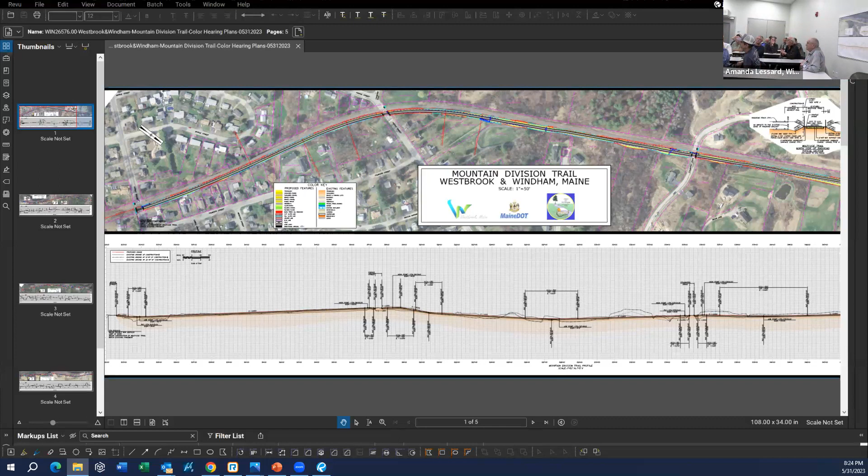Alan Goodman, I've been up with the hill for the last 80 years. Do you plan on replacing the rail that was ripped up from the Westbrook side, the prison, up to 202? They ripped all that up. You're gonna redo that? Not part of this project.

I think we're putting the trail in as part of this project, putting it down next to the road. It's not part of the project here, and we're putting the trail next to the rail because the DOT wants to at least maintain the ability to put rail in the future if that decision is made. There were some excellent articles in the Portland paper today about rail in Maine. You may want to read them.

We've spent $8 million on a Tiger grant to bring the track out of Westbrook, now we want 11 million more just for design. No, that includes the construction. So anyway, the ability to put rail in is not being taken away by putting this trail in. So they could sometime down the road say, hey, we're gonna turn it back into a railroad. That's correct, and the trail is still there.

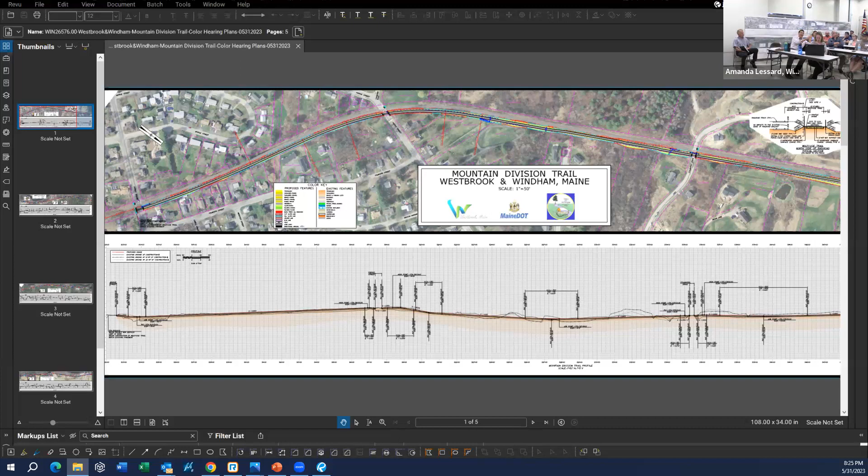But if you turned it into a rail, the towns are responsible for the crossings. That crossing up on Main Street's gotta be a $300,000 crossing, and the town's gotta pay. If I could jump in real quick, the tracks were pulled out years ago, then put back in some 10, 12 years ago, but it didn't get all the way to Main Street, Windham. The intent was to try to reinstall the tracks all the way up to Main Street. The $8 million was used, and they ran out of funds, so they only made it as far as they did.

This project is looking at focusing on the trail itself, but we have folks like Nate Howard and Jerry Dosty here from DOT. That could be a separate project, unrelated to the work we're doing. We're making sure that we design the trail such that the tracks could be finished up to Main Street if they want to do that, though there's some interesting terrain out there. So backing up what Mark said, the focus of this project is the trail up to Main Street, but there could be a separate project looking at tracks up to Main Street.

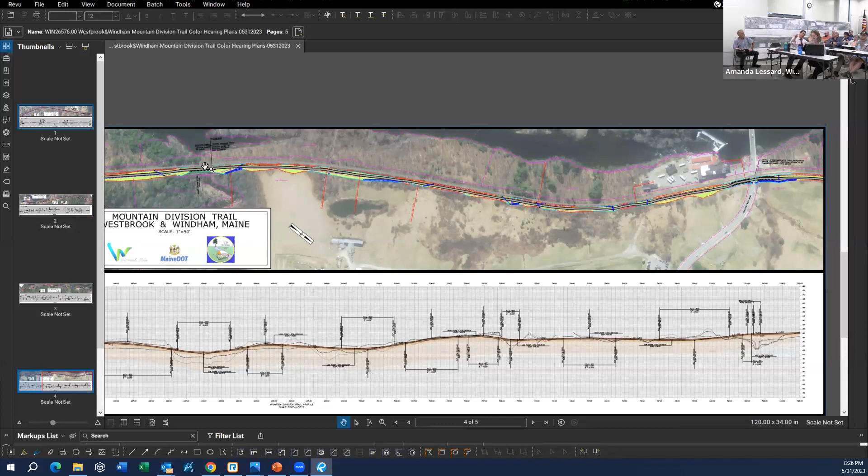Joe Carmen, 114 Ridge Road. I have pretty much the same concerns as anyone else. I got property on both sides, and so the fencing and maybe having a gate. I also have a vegetable field only 50 feet from the tracks, and the trail's gonna come onto that side, so we're gonna open up my vegetable field to anyone walking on the trail.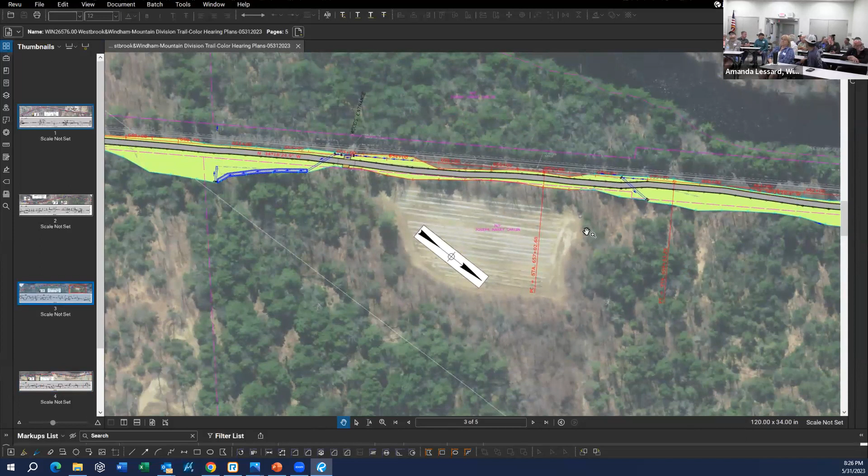The other concern is my access to the river for irrigation, that's how I irrigate my vegetables. And there's a lot of my property, and if you're going on the side, I think it doesn't matter what side of the railroad tracks, it's very steep. You're gonna have to put a lot of fill in, which is gonna come beyond the right of way, I think, because the railroad tracks are there, and then it sits like this.

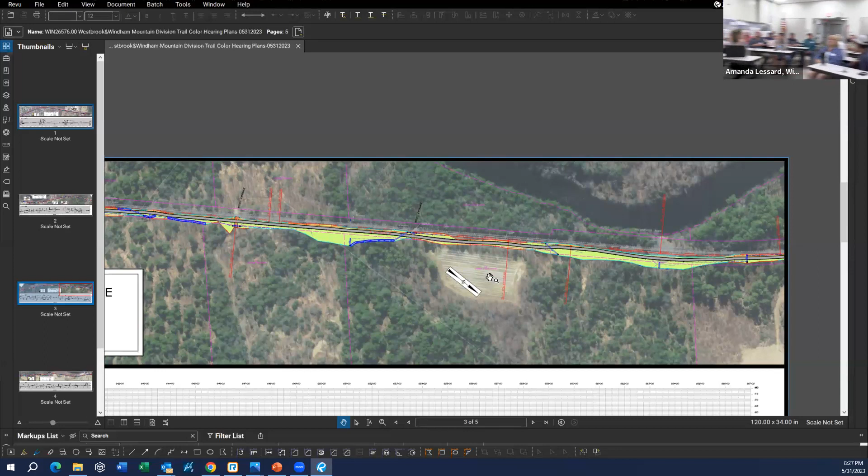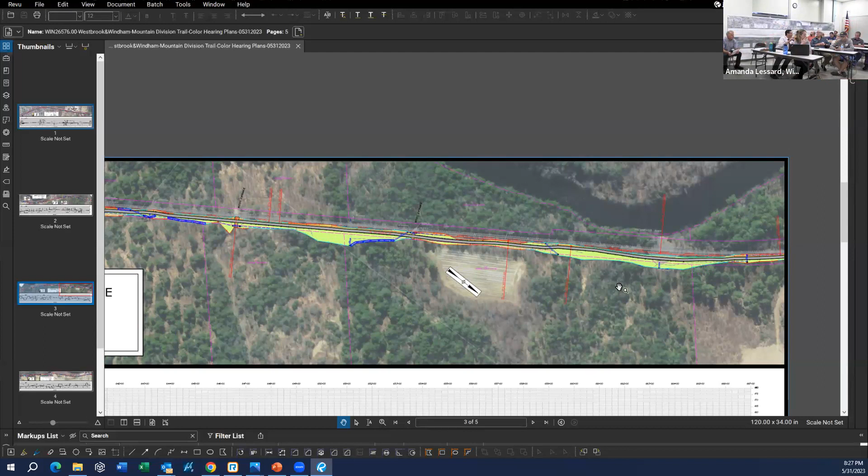So there's some concern. If I could just follow up on that, you're correct. We have some areas where the tracks are high and the land is low. We're installing a trail next to the tracks, and we're gonna have to chase that slope out. That's where you see these big green areas, areas where that might be happening, either a high fill or a high cut. You may see some areas where we minimize that by putting a wall. So some of those culverts that Jared showed earlier, those old historic arch culverts, we may be putting walls in those areas to minimize the impact.

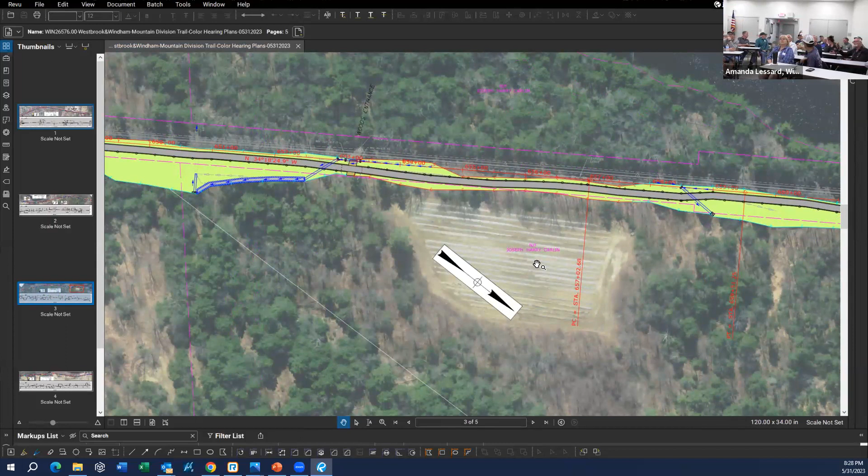If he goes back, you can see my last vegetable field, right there. And you're gonna put the trail there. People are gonna see that field, and can I request fencing and a gate to keep people out? Because I've had people come in and help themselves to vegetables over the years already, but now with more traffic.

And then just another comment is, what about hunting? Cause I hunt on both sides of the property. Is hunting still gonna be allowed near there? Jared, do you want to show the access on that parcel to the riverside?

Are we talking this one? Yeah, the crossing's right there. So we're maintaining that crossing. You'll have access to go on the other side. But can I require fencing and a gate, is my question.

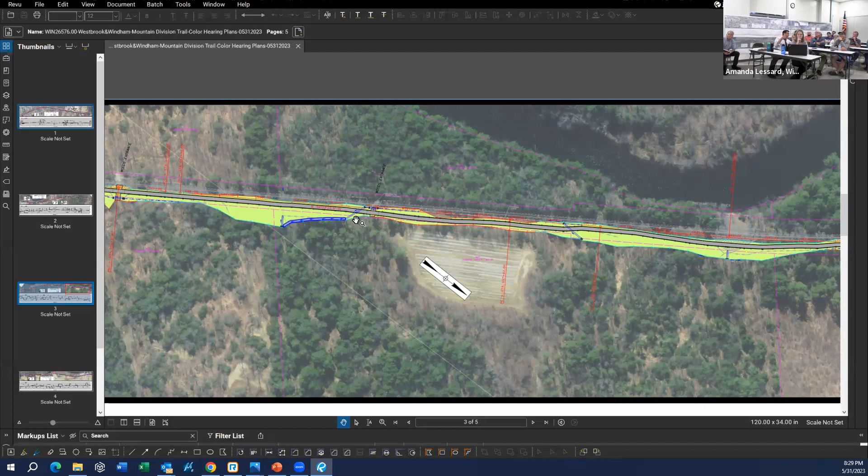Your comment about the gate is interesting because we talked about access for snowmobiles, we're probably not gonna allow access for four-wheelers. So we need to think that through as we go through this project. All these private drives, if four-wheelers can get down in there, we don't necessarily want them getting out onto the trail. We're either gonna have to install bollards at every one of these gravel crossings, or a gate, if property owners want a key, if I wanna cut wood on the other side. Yeah, I made a note of that. I just don't want people to say, hey, look, there's a pepper field here, let's go take a look at that. Yeah, well, we're gonna give that some thought, it's a good comment.

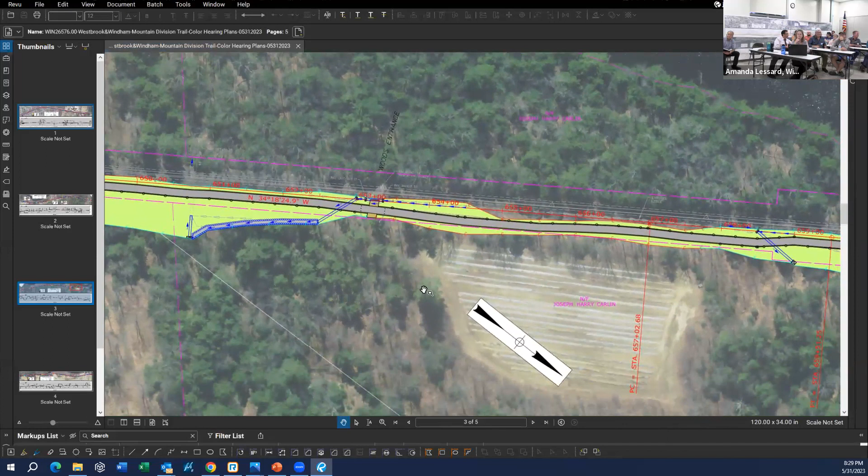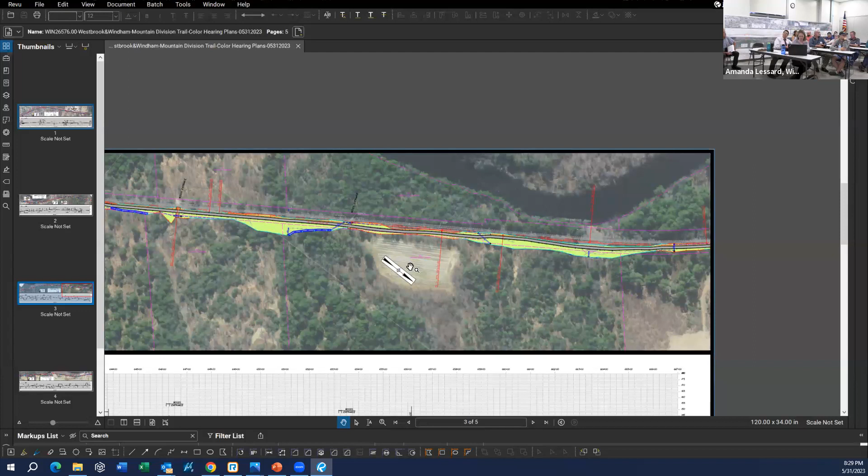Cindy Elder. I'm just wondering if the purpose of this fence is to protect people walking on the trail from the train, and if there are no trains, why do we need a fence?

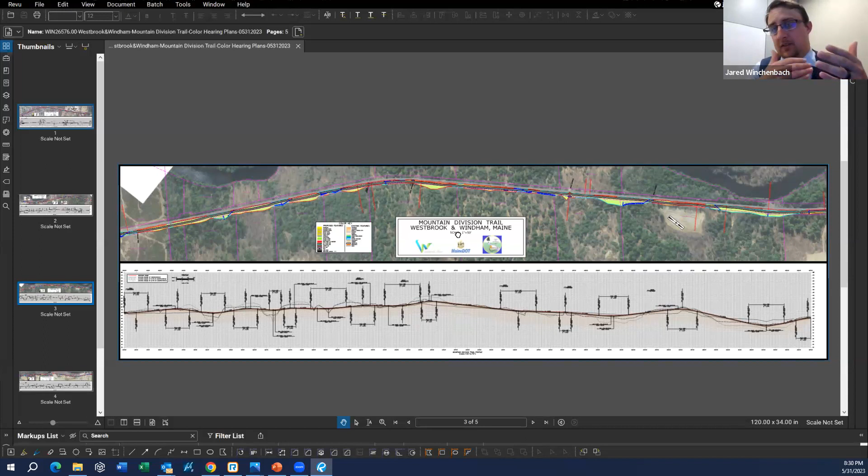So the two things, the fence on, obviously the fence in between, I assume the fence you're talking about is the fence in between the path itself and the rail. Really what it is, it's DOT standard for rails with trails guidance, that if we get within a certain distance of a trail or of the rail, the nearest rail, we need to maintain a certain level of separation. If we can't maintain that, that's when the fence comes in. It's somewhat for trespass, but it's just so that people aren't wandering from the trail across the rail in an area where a train may strike them.

Granted, as you mentioned, the train doesn't run through this section, but we're building this trail in a way that does not preclude the ability to install a rail at a later time. So we're trying to design it so that if the rail came in, again, not knowing when this project or a future rail project, if there is one, comes in, we're designing it for the condition in which the rails and us are in there at the same time.

Yeah, could you please review the timeline? I know you mentioned just projections for the 75% completion, 100% completion. I'm asking because this project is ripe for a federal earmark, and I'm just trying to look ahead to the future.

By the way, I just want to add, I think the project cost should include a farm stand for this guy.

We're aiming for 75% in about a year. We'll spend the rest of this year progressing the design, so in the next 6 to 12 months, that's what we're trying to target, to get the plans up to 75%. We'll have another public meeting between now and then.

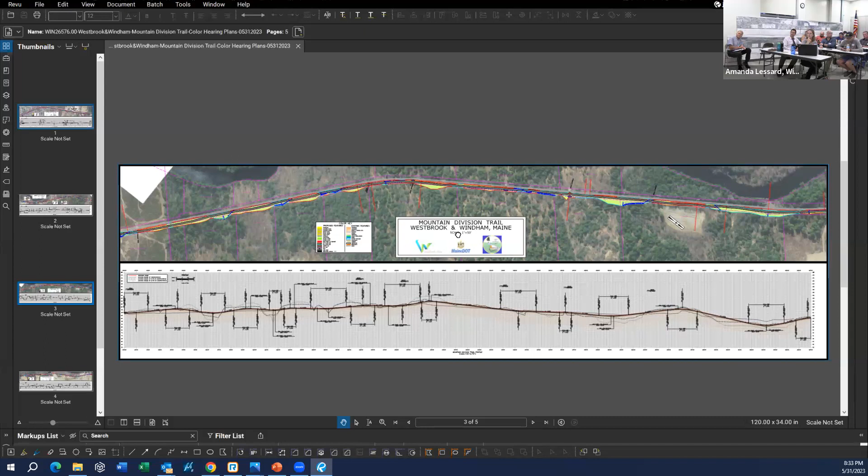If Jared, I can at least bump you off of your screen share and show people — if you're online, if you registered for this meeting, you had to go, I think, to the website, but it's the Parks and Rec website for the Mountain Division Trail.

It has information about the existing trail, but kind of at the bottom here is information about this meeting, and here are the preliminary draft report and plans. We'll also add the PowerPoint presentation, the video recording, and these color plan sets.

If we were notified about this meeting, can we assume that as things progress we'll continue to be notified? Yeah, if you're on the list — and we're also planning to. I'm assuming you'll keep us informed.

Were there questions online that you need to address? Yes, there are questions. Let me read this one: Nanine Chase Ortiz — you mentioned the trail grade itself is ADA compliant. She wants to confirm the bollards, as movable, still allow wheelchair or recumbent bike users to get on the trail. Yes, correct.

Nanine Chase Ortiz also mentioned that the number of sections built up 30 feet or more are nowhere near the 11-foot distance between the rail and the proposed trail. How will the trail be built up and the sides protected from people falling a great distance? The steep embankment will be pushed out so we have a plateau to put the trail on top, and then we'll protect the slope from users with some form of fence.

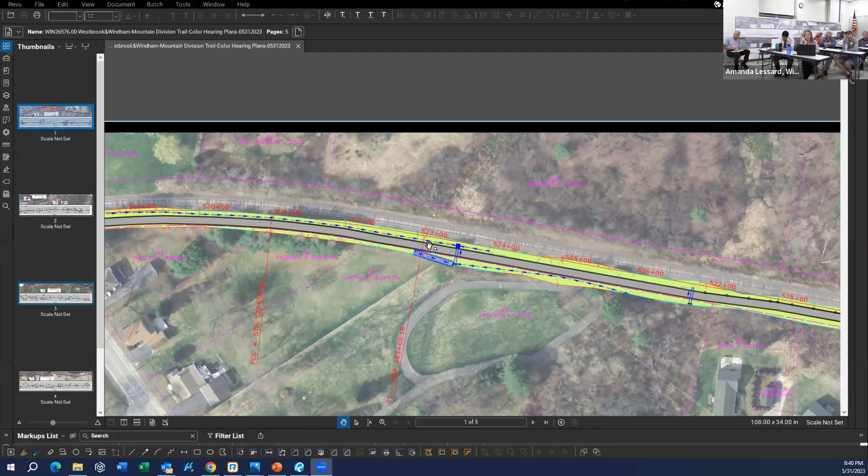Really, the consideration for what side of the trail to be on versus the tracks was location. That's where we had right of way, where there's space.

All right, that's the end of the Zoom questions waiting, unless there's anyone that wants to raise their hand. Is there anyone else in the room? Will this project still continue after Congress's vote tonight on whether or not it'll get passed?

I think, no, we don't need that to finish the preliminary plan. We've got budgeted money for this effort.

Yeah, I guess there aren't any more questions. Thank you very much all for coming. Like we were saying, we captured your comments and we'll try to address them the best we can, considering the standards we need to meet for this type of trail, and obviously the budget constraints as well. But we will be working on developing the design for the next stage, completing field work, and we'll keep things up to date as far as where we're at, so you can follow along and attend our next public meeting.

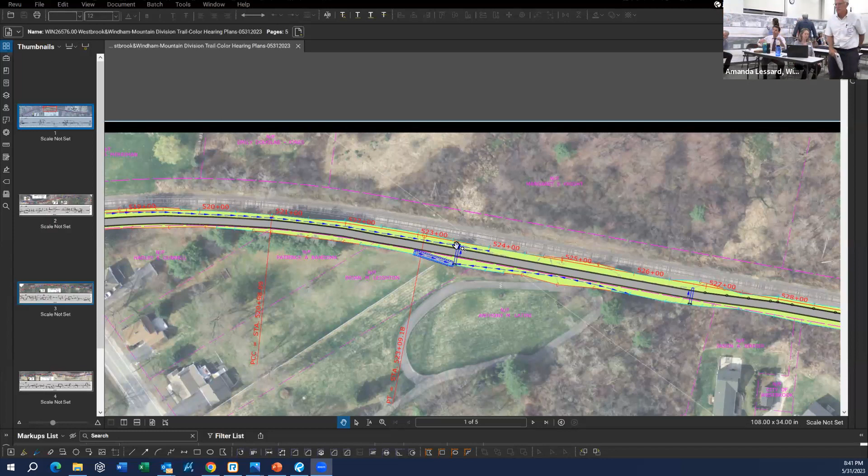Thank you. Thanks for that. Thank you, Karen. Thank you, thank you guys for having us. John.